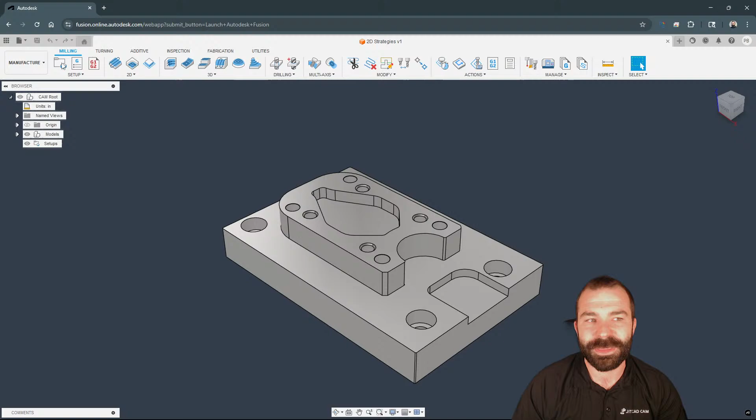But as you guys will see me do here is I can still navigate the same, again, creating my setups, doing my different things inside of Fusion. I just thought you guys would like to see something like this. That's all. So again, my XYZ coordinate system going in, maybe we're going to do some adaptive clearing, who knows? And again, as I've always told people, you don't know your car is slow until you get into a car that's faster, of course.

So again, we can turn on all of our cloud libraries, go grab our tooling. I want to get a flat end mill, as you guys see. Pretty typical stuff. Let me know in chat if you guys knew about this or if this is something that might be able to help you out if you're on a little bit of an older machine. Again, as you're going to see, probably going to take a little longer than you would like, but it is something that actually runs CAD and CAM quite well.

So again, I did test it a little bit earlier. It was 10 times slower from a time standpoint when I started throwing more complex stuff at it. But again, it's something nice to have if you don't have a high-end computer as yours truly does. So let's go ahead and go back to my Fusion. Now, if you guys wanted to see that a little bit better on my version of Fusion, again, I pull open that 2D strategies part right here. As you're seeing, my navigation is almost instantaneous.

Now, keep in mind, I am on a 14700F processor. It is a later generation. So as you're seeing me move, it's of course acting much better and much quicker than most people would anticipate, depending on your price tag, right? So again, as you guys are seeing me go through my library, same thing. We're just going to grab a 1/2-inch flat end mill. And just like that, we're programming our part, right?

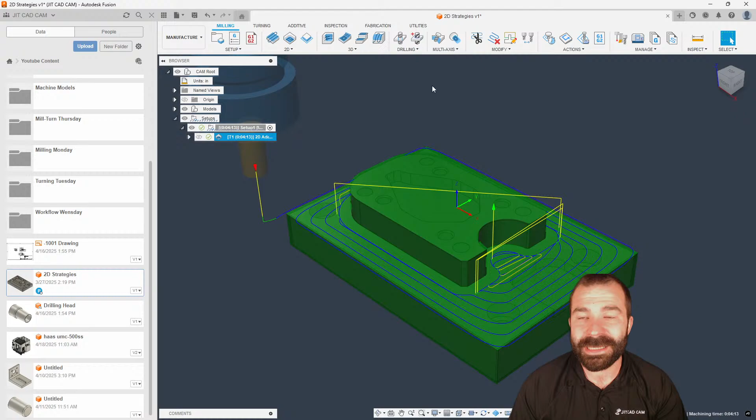So as you saw, again, in a pinch, works quite well. Maybe you don't have the best of machines, or if I had my tablet near me, I could actually pull this up on my tablet. So getting back into the other thing that Travis was already asking about is the permissions so that you don't have to deal with the email verification code.

Now, a lot of you are going to question what that is, but what I'm going to do is I'm going to go to my profile. I'm going to verify my profile real quick so that you guys don't steal any of my information that's not already on my website, right? So give me a second here. I'm on my other screen. And where is it here? They must have moved it, because I do remember there was a time where you can't necessarily turn it off, but you can actually go in and, oh, so you can't even turn it off anymore, it looks like.

I'm going to pull this over in a second so you guys can see this. I just need to get logged into my account. Yep, and now it's doing the password verification. So let's do this here real quick. So this is what I actually wanted to show you as a whole. So for any of you out there wondering what is happening, this is the new verification process.

It's a 2-step verification. What it's doing is emailing me the code. Now, one thing you can do is you could say, don't ask this on this browser for the next 30 days. So again, what I'm going to do is I got to get back up on my other monitor, grab my passcode.

You guys can write that all down real quick. We're going to get into my actual Fusion account. Now, again, you could set up 2-step verification, and you can actually use something like Google Authenticator by utilizing the QR code. Now, this would work better for a lot of you out there so that you could just get the code directly from your phone.

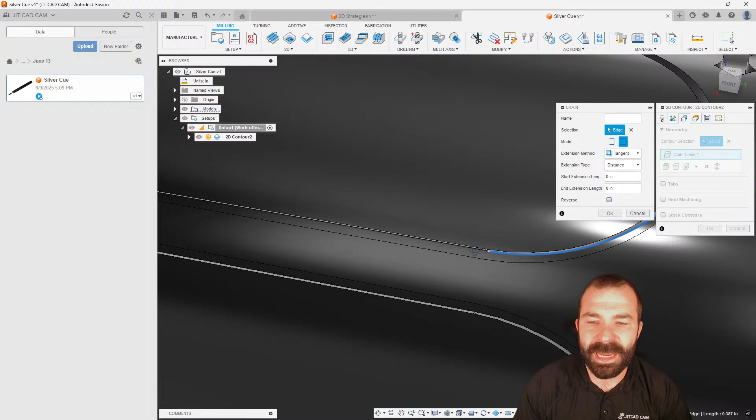open chain. And again, what I did there is I held the Alt key on my keyboard, which allowed me to pick one segment. And then I picked that segment a second time to define how I want to extend it and how I want to wrap it around, right? So again, as you guys can see, I've now defined that very first chain. I always like to start with one and work my way further through.

Again, in this case, we're using a tiny little end mill for this purpose. And just like that, we have now defined a single path around our part that allows us to cut a nice area for us to create that inlay. Now, for a lot of you out there, you're probably going to question, hey, how do I shorten this up so that we're not overlapping or we're running into the part? And while that's pretty easy to do, we're going to have to do a couple of things.

First and foremost, the diameter of my tool, as you can see, is a 10 thou tool. So I'm going to need to reduce my chains by at least half of that, right? So in this case, I'm going to say -5 thou. And as you're going to see, it's going to shorten that little blue segment up a little bit here. And now from that, I'm also going to turn off lead in and lead out.

Again, the goal here is to cut nothing more than a nice clean inlay that we're going to come back and basically press a piece of metal in or use some type of epoxy to make this pretty.

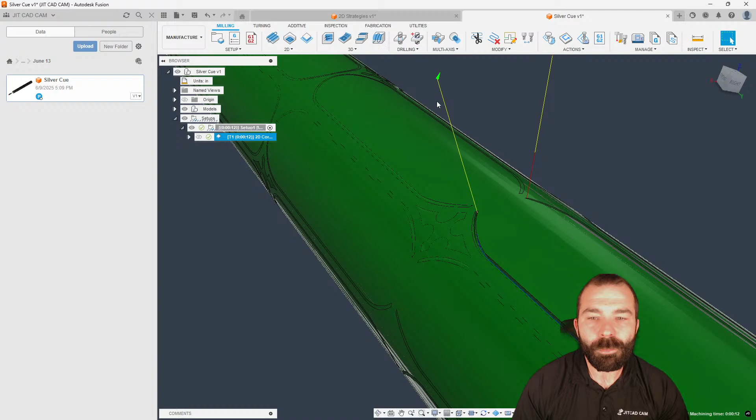So now that I've done that first one, this is where I can go through and I can add additional ones, right? So again, we have our first geometry. Now, something I would pay attention to is if this is something that is identical all the way around, and in this case, that one chain is identical. So I'm going to go ahead and move down the actual axis here, and we're going to define the next segment.

Now, the reason why I'm going to do this is because I have things like the ability to pattern, so that we can actually get everything set up on one clocked position and rotate it around manually. So again, we're going to go ahead and say -5/10. Not 5/10, 5 thou.

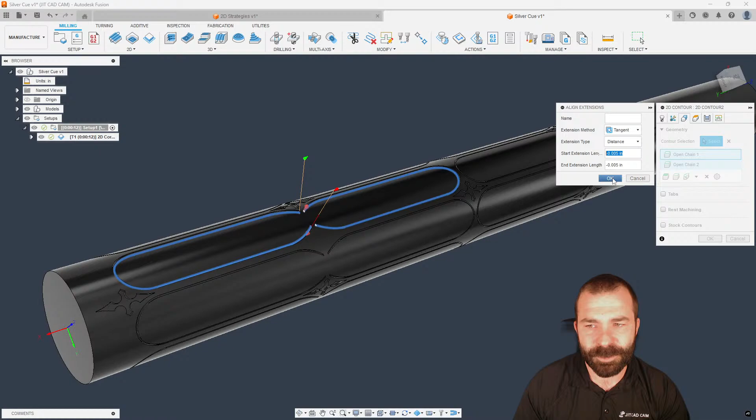Now, here's another pro tip for a lot of you guys out there: in the event that I'm utilizing multiple chains on a part, I can actually highlight those chains using Control to pick each one, or Shift for first and last, and I can align extensions and bulk update these as well. So just keep that in mind. It makes your workflow much easier at the end of the day. We're now doing 2 of them.

And this is where I would turn around and do something like a new pattern. So we're going to say circular pattern around the center of our part. Now it looks to be, what is that, 6 or 7? That's 6. So we're going to do 6 instances. And just like that, we're now cutting that profile all the way around the outside, and we're creating that stock model to show us where our inlays are, right?

The start minus the start extension. Run that by me one more time, Travis. Granted, Travis, you have my cell phone. You could always just call me and we could put you on the phone live.

So again, as you guys can see, we do one, and we patterned around to do the others. We could incorporate the same thing here for any other decorative pieces. The luxury of the 2D is you are getting what's called the wrapped toolpaths. So we could say a wrapped 2D adaptive clearing. I need to pick my geometry, or actually my cylinder wrap around, the pocket which I want to machine out.

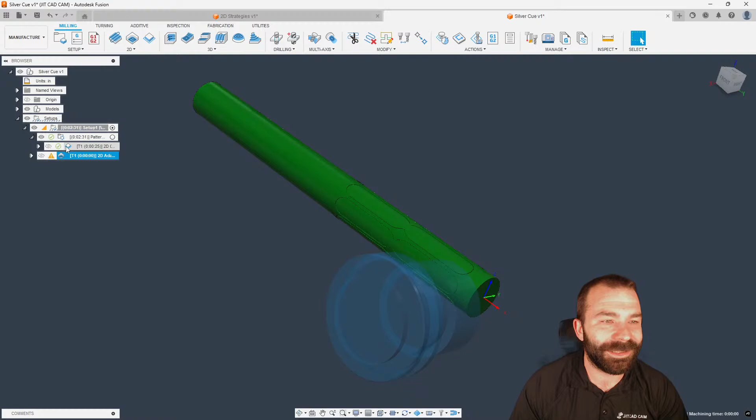Yeah. So I misread Travis's message. He's saying a negative on the start, which is exactly what I ended up doing, and I'll show that to you guys here. Let's jump back. When I was setting up my extensions, his comment was about a negative on the start, meaning add a negative versus a positive if you wanted to create an extension that starts further out. I've shortened mine up by just typing in a negative, and that shortened up my chain. So awesome, Travis. Thanks for pointing that out. I appreciate it.

So let's go back and see what we have going on here. We do have an issue with our toolpath. Is that, oh, nope, that is an email. So we're going to skip that one. What we're trying to figure out is why we can't do an adaptive clearing in this pocket. The problem is Fusion is not doing the best job of telling us why it can't do it, so we need to be more investigative. It is saying invalid tool. So let's go in and swap out our tool.

Now, keep in mind, right now we have a ball end mill on here. In this case, it's actually not a ball. It is a ball, but it isn't a ball. So let's fix our tool. First and foremost, let's double check our cutter and get this swapped back out to a flat end mill, not a ball end mill.

As you guys can imagine, yours truly has completely wrecked some of the tooling in the tooling catalogs, because I get to play this game all the time of how do I troubleshoot? How do I get something to work right? What does it need? What doesn't it need, right?

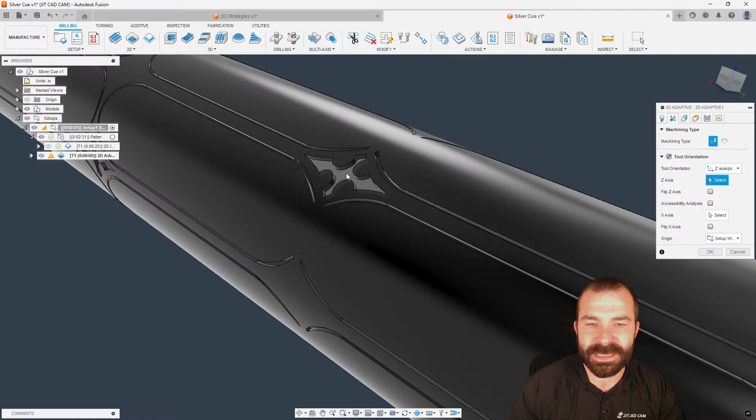Now, as you're going to see, it's going to be a little tricky because there is no vertical line in this pocket. So I would need some way to create a flat. Now, I am actually going to steal possibly one of those vertical lines on the end of my part. And even that is not allowing me to set my Z axis. So this is, again, where I might need to do something which involves jumping back to the design.

Now, if I create something like a plane, and again, that can be a plane through two edges, plane through 3 points. There's a ton of things that work really, really good to set a clock position. So what I'm going to do is I'm going to do a 3-point plane. So let's go ahead and grab 3 separate points here. So as you're seeing me do is I'm actually using those couple of corners down there at the bottom.

And again, I'm getting an issue. And that issue is because we do not have construction planes turned on. So again, as you guys are seeing in real time, I've now created a plane that should be flat across all 3 of those points. So again, we go back to manufacture. Let's go back into our toolpath, utilizing our tool orientation. I'm going to go ahead and pick that plane.

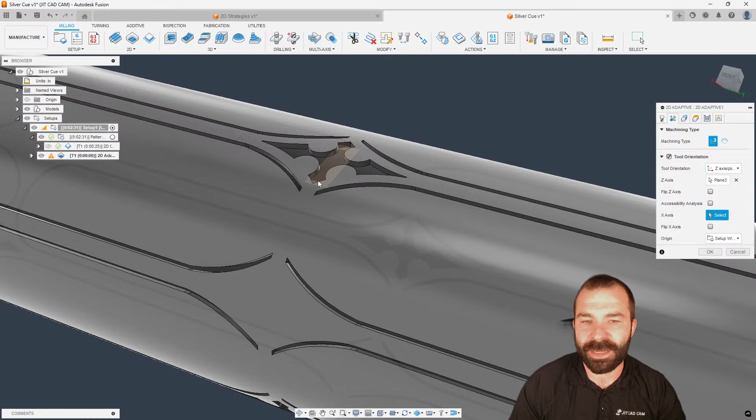Now, if you're having troubles picking this plane, something neat you could do is you can click and hold. Again, that's a left click and hold. And as you're seeing, it's giving me all of the faces within the view of where my mouse was. So I know that is a plane. It's not the bottom of the pocket. It's not the outside cylinder. It's just that plane face. And now you can see my Z axis is orientated up. Again, let's go ahead and hit OK and see what we get.

So as you're seeing, some of my problems in this case, now taking you guys on a wild goose chase here, just because I like to show you guys what we go through, how to troubleshoot stuff. It seems to work much better for you. And as I always tell people, my end goal is for you to not ask me questions, right?

So a couple of things are probably throwing off this wrap toolpath. Number one, the size of this tool can't really get in here the best because of what we have called stock to leave. Now, the stock to leave is massive when you consider this is a 10 thou tool and we're leaving 20 everywhere. Again, adaptive clearing is a roughing strategy. So let's go ahead and change our stock to leave and let's go down to about 5 thou.

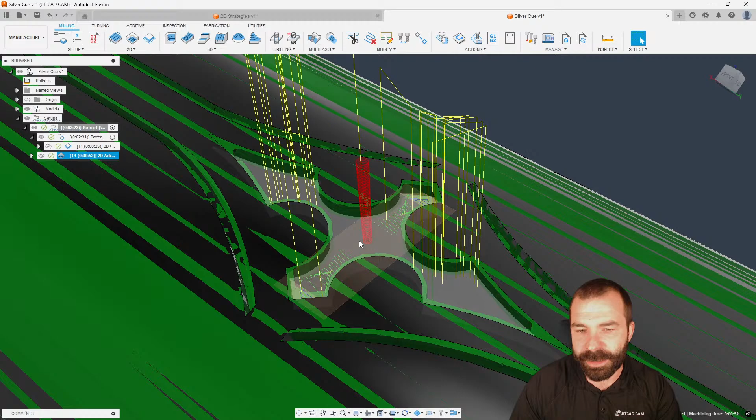Now, keep in mind, a 10 thou tool, I'm going to have to make a couple of finish passes at some point, but this should, in theory, give us a lot more room to work with. And again, why we can't see that toolpath is because it is a concave or convex shape at the bottom here, but our plane actually sits below that. But I can see we are now working in the entire area.

So again, let's go back to 2D adaptive clearing. Let's get rid of that tool orientation, turn back on our wrapped, round the outside cylinder, and see what we get. So as you guys are going to see now, wrapped toolpath did work. It did work with that tool. The problem is we didn't have enough area for that tool to work within, right? So I would have had to go to a smaller tool, or, in this case, I changed my stock to leave.

And again, pro tip for a lot of you guys out there, we can go ahead and just jump straight into our 2D contour for finishing. And another trick I like to show people is, in the event that you wanted to, we could actually use 2D pocket clearing to go ahead and clean up those floors as well. So again, we're using a roughing strategy that uses flutes, right? The side of the tool to open everything up.

Then we come back with our pocket clearing. Again, this is going to give us a nice floor kind of pattern, clean everything up on that floor. Lastly, cleaning everything up on the walls, as you can see. So one thing I am seeing here is, one, my graphics card is starting to hit the end and the limits of what this wants to calculate. This is where I love this new ability to go in and say, you know what, I need more quality.

I need to change out to maybe custom presets. But I can see here that we are finishing deeper on the contour than we are on the pocket.

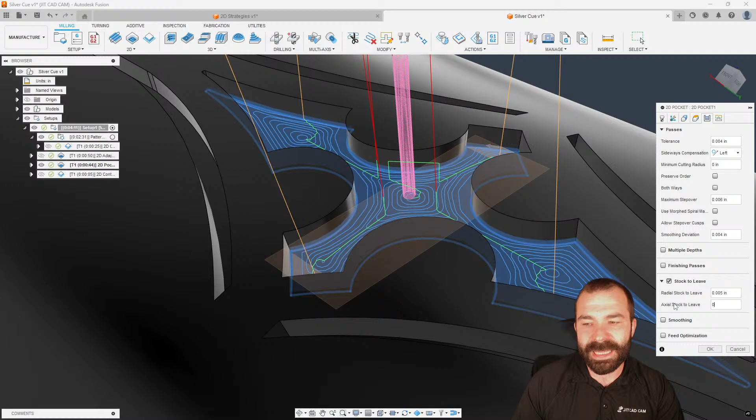I'm going to get to your part here in a minute, but let's wrap this up the rest of the way, right? So again, we jump in. In this case, our stock to leave on the axial is going to be 0. Again, we want to go deeper. We want to go to the true depth of that pocket. And just like that, you're now working all the way down to the floor. And then we're cleaning up our walls.

And if we were to turn our model off, you can see this is a little better representation. But because this is so small, the mesh in the background is what we're starting to see fall apart more than it is actually my graphics card.

So Ash, let's go ahead and get your part opened up. I'm going to go ahead and swap screens here real quick. Give me a sec. Ash, where did you send that to? Did you put that in as a support ticket? You did. Awesome. A chatter-free toolpath on a copper bushing. Oh, man. You guys making fun of me, don't you? Go ahead and get you all opened up here. I'm going to go ahead and minimize my other screen so I can keep an eye on you guys.

How's everybody's Friday going? I hope your guys' Friday is doing way better than the start of this stream did.

Stuart, I'm running a 4060 graphics card. It's nothing special at the end of the day. Again, I just did a pre-build system. I bought an Alienware computer. I put more RAM in it personally, but there were 2 things that I knew going into it that I recommend to everybody. Go for a high-end processor. You don't need a high-end graphics card, right? Perfect example, 14700F is what I have for a CPU. And then my graphics card is just a 4060. Now, given the generational stuff, that whole total bill, I think, came out to like $1,300, and it runs like a champ.

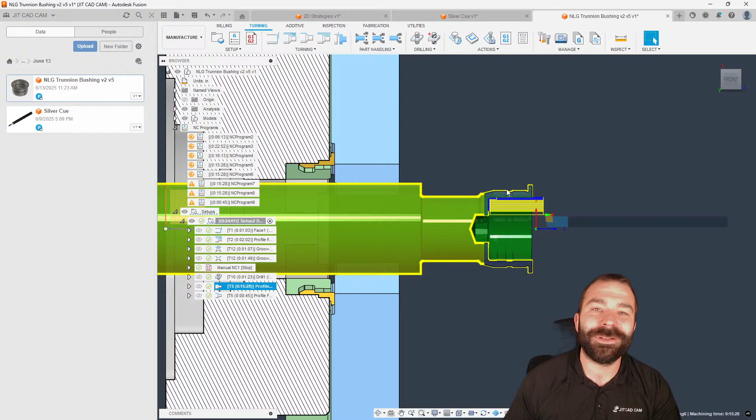Some chatter be gone spray. I like it. I've seen every trick in the book at this point. I think I've seen people tape, you know, quarters onto stuff, rubber bands. Travis, we could always take a look at the specs of your laptop. No offense to Travis. I'm not calling anybody out here. I see it all the time on the Facebook groups where people are like, man, I have a $3,000 computer. Why doesn't Fusion run right? Well, first and foremost, it was $3,000 3 years ago, which means it's like a $600 computer. But as you can see, we can also evaluate that. I do have some good videos on performance settings to help you guys out as well.

So anytime you are doing the bore on the ID, you're getting chatter. So let's look at a couple of things. First and foremost, toolpath looks pretty good overall. I don't see anything too crazy here. So what I'm going to do is I'm going to go ahead and edit the toolpath. Now, very first thing I always like to look at is what your speeds and feeds are kind of at, and what they should be at based on your tooling.

Now, if you can, in this case, Ash, can you throw into the chat if you have the actual specs on your tooling, like insert ID or an EDP number? We can look it up and take a look. I would assume, and this is just a quick assumption, if you're running at 2,500 RPMs and a feed rate of 2,000, you may be too aggressive on this cut altogether. Now, don't quote me on that. That's why I want to see the speeds and feeds based on the material, right?

So let's move a little bit further over. Now, another thing that I have seen in the past cause problems from chattering is that you're taking too small of a depth of cut, right? So again, it's depending on, and I learned this lesson very hard on milling.

So if I go back here to this 2D strategy, I used to get these tools. Now, this is not me promoting a special company, but Destiny Tools makes some killer tools for running in aluminum, but you have to be able to push them as hard as the tool requires, or else they sound absolutely terrible. It was one of the first times in my career where I was taking a 40% step over and a 2 to 3 times depth of cut and running just crazy, crazy hard, right?

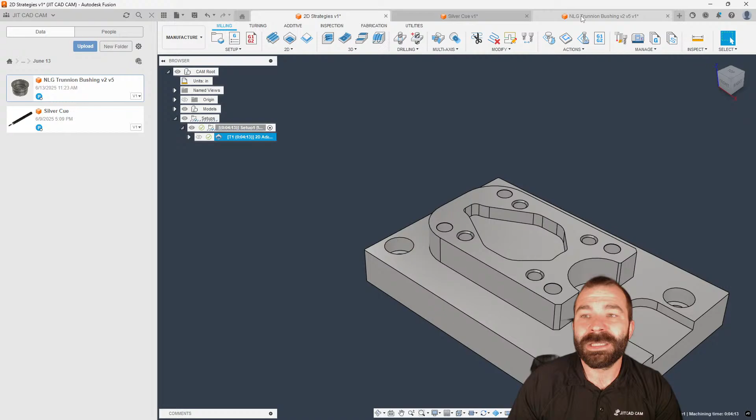So again, it looks like we have a KC 730 insert. Who makes that insert exactly? We'll give you a few minutes. Is that from Haas? Kennametal. All right.

Stuart says just tell ChatGPT what you want. Osman's got an entire inner tube from a bicycle wrapped around his machine to help with dampening chatter.

A few other questions I would have for you, Ash, as we kind of walk through this: one, this boring bar is massive. How far is that boring bar sticking out will always be a good question as well.

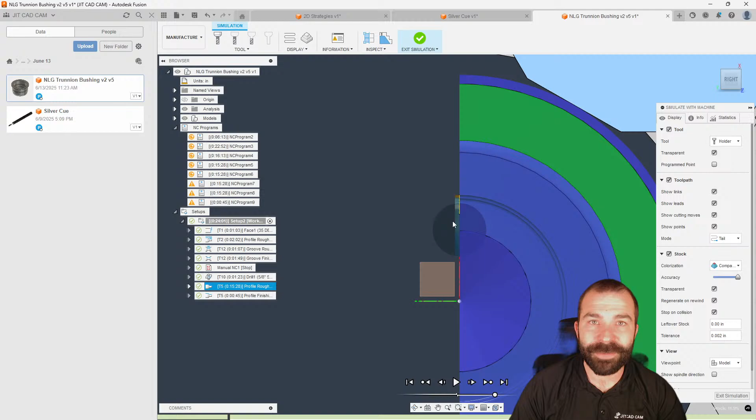Sorry, guys. I got a couple of emails and texts. Let me just double verify everything real quick.

But again, for non-ferrous, I always lean towards H1 shiny inserts from China. Designed for aluminum. The sharp edge does the trick. But he turns manual. Cosmin, that's a great point for sure.

The first part of the chat says it doesn't chatter that much. So all your OD stuff isn't chattering? Is that the same inserts on the OD? So that would be my narrowing down so far. First and foremost, if your OD work is going very, very well and you're not getting chatter by any means, that would tell me: one, is it the insert? Is it the insert material? Is the alignment of the insert actually proper, right?

So I do see this a lot on boring bars: you start chasing your tail and wondering why something's not working right. But when you look at the orientation of the boring bar, now I'm looking at this straight down the end. Let's get flipped here and let's get material out of the way. As you guys can see, my boring bar might be angular, off a few degrees, either up or down, right?

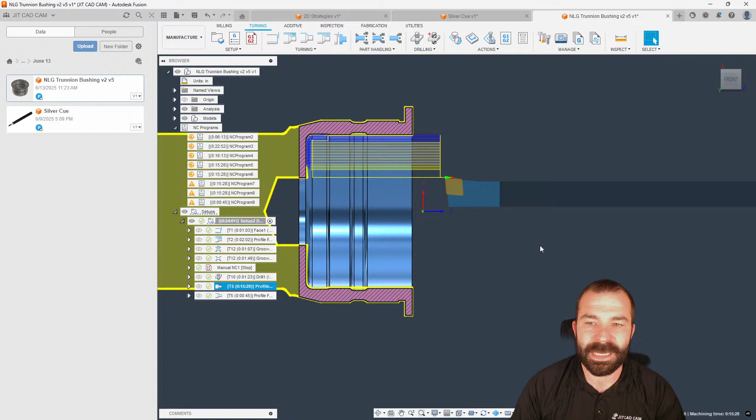I would tell you, because you're dealing with an X-axis kind of machine, an easy way is to put a parallel on top of it and then an indicator over here on your spindle and then just run it in and run it on your X, because you should have flats on there, right? And again, this could just be, is it in an actual sleeve or is it flat mounted on a tool post?

Hold on one, guys. I got a phone call that keeps coming in. Give me 1 second here. All right. Oh, wrong screen.

We're back. Okay. So it's in a sleeve. Yeah. So when you put a lot of these in a sleeve and it's got a couple of set screws that go down on top of it, when you tighten those set screws, sometimes it rotates itself or it doesn't actually sit flat. So again, this would just be my take. Key element number one: let's make sure you have the right speeds and feeds. I see a lot of bad come from the wrong speeds and feeds or the wrong depth of cuts.

Given these are Kennametal inserts, you should be able to email the tooling rep and he should be able to get you with an applications guy. Ash, I don't know where you're located in the US. If you're in Minnesota, reach out to me. I know the apps guy. I will get you in contact. But that would be the one thing that I tend to look at.

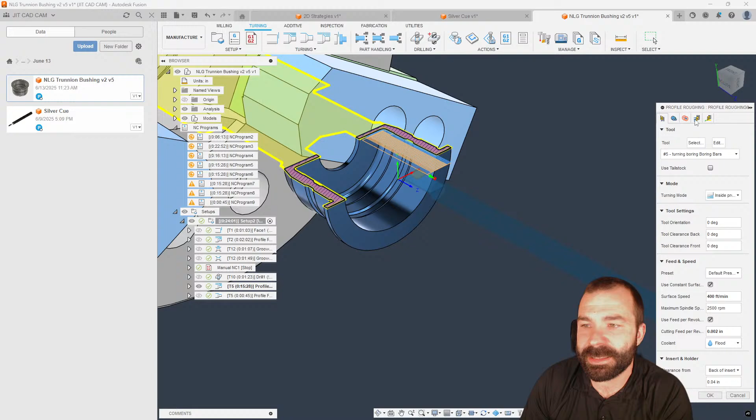I don't think you're wrong. Also, Ash, I think by all means, you could have easily also done something on the inside. Now, I am going to fix what you have going on here because it looks like you actually plugged in things in the wrong order. Because it looks like you're trying to drill at one point. Let's get this window moved over. You're drilling with a 5/8 solid carbide drill. And I see this mistake. Again, Ash, nothing bad on your part.

Inner radius, that should actually be where we plug in our 5/8. And then what I like to do is point my clearance at my inner, right? So we're going to say inner, and then I would like to back off by about 40. Now, what you're going to see here on my Fusion is, one, this tool path is now going to start all the way back out here where this blue line is. And then we're only going to wrap it off back to that orange line. So as you guys will see, now we're getting that full tool path that we were having some problems with.

Oh, crap. Travis has got a TM1P. That's the machine I learned on back in the Marine Corps. That's a great machine. I think a lot of people give that machine a hard time, but man, that machine can do so much.

So as you guys saw, I went ahead and adjusted that inside bore tool path. When we simulated this originally, you guys noticed that we were hitting with a really big cut the first time through. This time we're making that nice clean first cut, second cut, third cut, right? So again, based on the information that we're given, it sounds like he's only getting trouble with this tool on the inside of the part, which would lead me to believe it's something with the tool, whether it be speeds and feeds or the way the tool is in the machine.

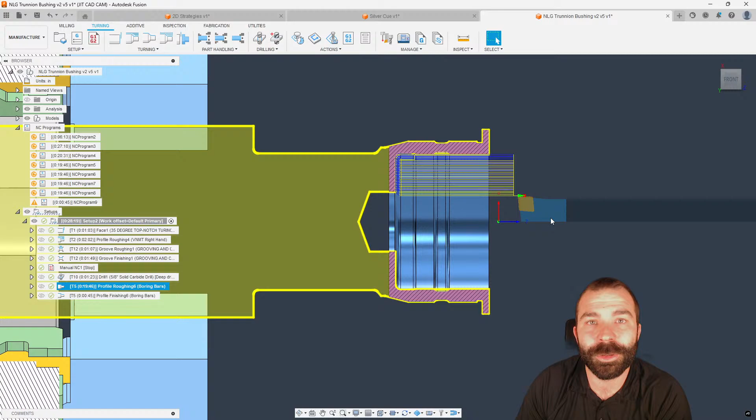So you just had to pick up from a different location. Okay. Adaptive turning in this case isn't going to do anything of value. Now, if we were talking about something like the outside of this part, the reason why I say it's not going to do anything of value is because it's all based on the geometry, right?

So if we did turning adaptive roughing here, let's go ahead and pick our tool. Now, what it's going to want is a grooving tool or like a lollipop or a dog bone. I stand corrected. Give me a sec here. It did not like that tool. So let's go back to the default library. And we are going to grab the OD grooving tool. Now this one here, if I can get it moved, you're going to see it's a circle profile.

And as you're going to notice, what it's going to do is kind of like adaptive clearing on the mill. The idea is that it's going to slowly load up that tool using arcs and radiuses. And with that, it's going to try to maximize tool engagement before it actually comes out of the cut, right?

So again, because we're kind of working in a valley here, it works really well to come in, or if you work on like a hub or something like that, where you have space in between, this is where that arcing in, arcing out to help pull that chip and constantly engage that cutter is going to work quite well. Stuart, I hope that helps you out a little bit.

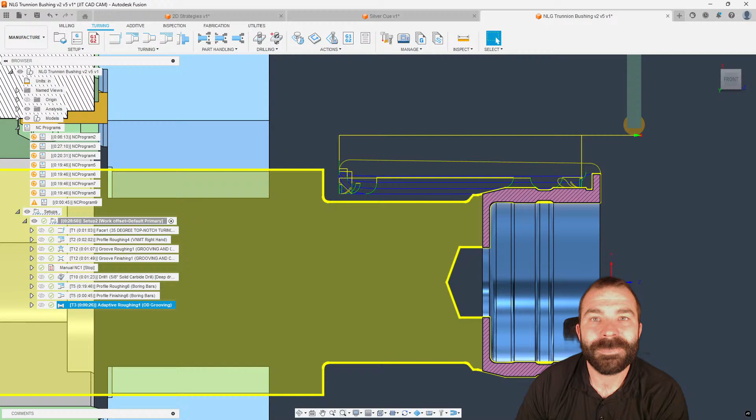So I think if you would switch this part, and hear me out, this is just my thought on it, you have a lot of meat here on this particular part. Now, this would be something that might work. So Ash, did you end up making one out of, say, a piece of aluminum just to test run it? Because your vibration on the mill could be from the flute hitting as you go around it.

So Ash, that would be where I would start, because if you put a piece of aluminum in there and you reran this part and you still get chatter from this tool, that would lead me to believe that it's 100% on the tool and the way the tool is in the machine, right? Now you would have to adjust your speeds and feeds, of course, but if you adjust your speeds and feeds for aluminum, you run it, it runs perfect, no chatter, no vibrations, you know that it's speeds and feeds on the insert. It's not the holder or the holder being clocked a little bit in the machine.

Facing from the inside out. Good question. So I'm going to take this facing cycle right here. Go over to our passes tab. Now you're going to notice we can actually change from outside to inside to inside to outside. So again, very easily by swapping that one particular thing. Go ahead and simulate now.

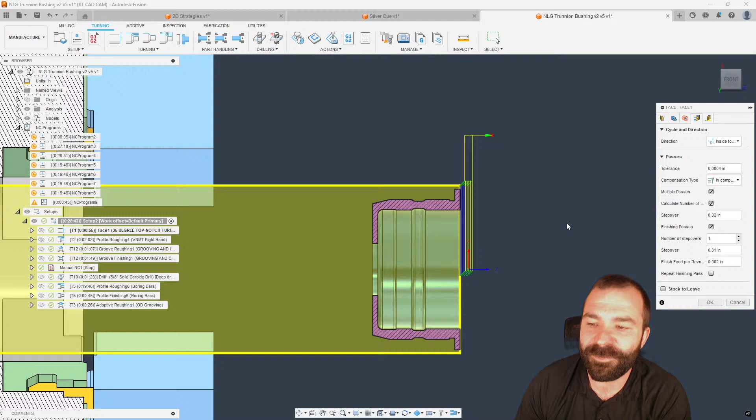You're going to notice we come all the way to the inside of our part, and then we are back dragging outwards. Now we are getting collisions here because Fusion is thinking we're hitting and we're starting to load that tool up too much. Now that is adjustable in your settings. So if you were to try to get rid of those errors, just remember when you're doing your actual tool setup, we don't see it here. So we are back dragging on that tool, and that is what Fusion thinks is causing an actual collision.

Now, something I prefer to do, and this is just me, is if I wanted to back drag up and around, I'm going to create a new setup here just so we don't have any contamination from tool paths. So let's get our Z-axis flipped around. Beautiful. Stock, we're just going to do a fixed size cylinder. So let's say we were going to do the part the other way, right?

And so we can all see the inside of this part. Let's get our X-axis flipped. So the idea is that you would want to face up and around the outside profile, right? So again, we go in, we create our tool paths as always. Let's go ahead and do an adaptive clearing. Let's go ahead and grab a lovely 35-degree tool.

Beautiful. And now something to keep in mind, this is where we play the game. And this is why I love using the OK method, for you guys out there that are new, or somebody that struggles with getting good tool paths: I just pick the tool path and hit OK. But if I evaluate the blue line scenario, for example, the blue lines don't start far enough in front of my part, and then I go to my tabs, I can see the very first tab is geometry.

This is in my Z axis, right? So this is where I don't want to start the front of my toolpath from model front. I want to start from stock front. And just like that, you're going to notice we can now rough that all out in one shot.

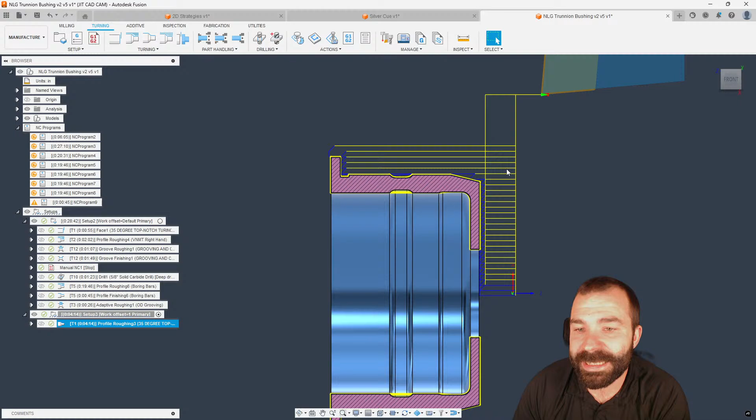Now, if we wanted to get technical with this, this is where we could go in, turning profile finish. The reason why I did that for all of you out there is because it's bringing through that stock front. Again, we use that OK method. And as you can see, we're going in, we're starting all the way down at the bottom, dragging up, out, and around our profile to finish that part.

Bogdan, I hope this helps you a little bit. I'm going to go ahead and simulate this just to show you guys. Again, we're starting down at the front of our part. We're dragging up, around, and all the way out and finish cycle.

Now, there's a couple of cool things you could do with this even further, right? So based on this tool profile, I may not want to back drag. And by back drag, I mean drag it up this surface, right? So I can do things like turn on no drag. And what no dragging is going to do now is force the tool to always feed in on X or in on Z. It's never going to try to pull back in a cut.

So as you guys will see here now, we'll go ahead and simulate this one more time. In this case, we are facing traditionally down the front of my part. And then we are coming back in and turning the OD and making our way down. Again, you've noticed we jumped out there because we didn't want to hit this back wall and drag up. We want to come out, around, and back down. And then again, we come back up to that top segment and we went ahead and cut that little area there. So again, no dragging, great asset.

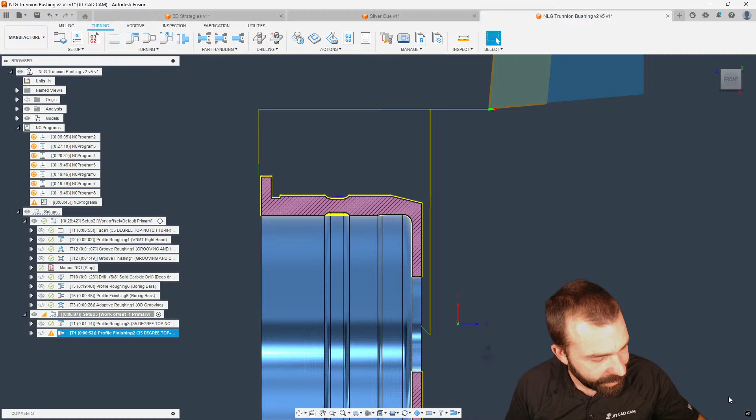Cool. Any other questions outside of that? I see my phone keeps going on. Are we getting any? Looks like that is just a reminder. Awesome. I'm going to go ahead and check my emails now.

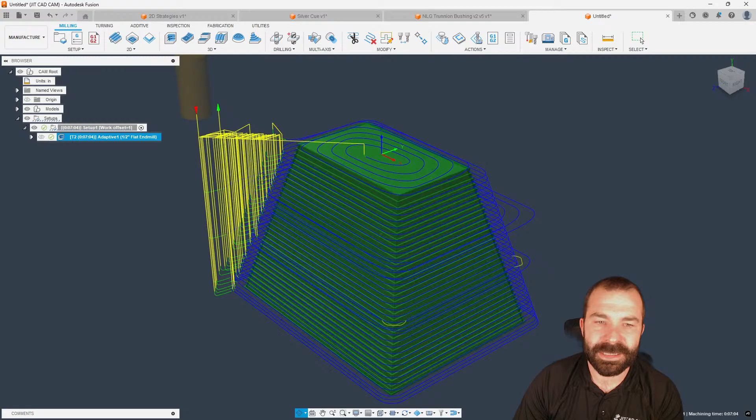So the curiosity is, and I understand this completely, when we run this particular toolpath, we work at a maximum depth and then we work upwards. Because we've achieved maximum depth, we may need so much horsepower, so much torque, but as we move upwards, we are taking a smaller and smaller cut against that material. So the question is, can we speed up the process working upwards? Well, there's no real easy way to do this.

As you can see, there's what's called optimal load. There's no other settings outside of maximum roughing step down. You have fine step downs. You can do what's called machine shallow areas, but this isn't going to adjust your speeds and feeds. So what I tell most people is if you're really trying to get a lot out of your cycle time, a really neat trick is, one, take your maximum roughing step down and increase your fine step down.

Now, if I was to say 0.9 and then do half of that at 0.45, what you're going to notice is I have a lot less of a staircase effect here. So one, I've reduced cycle time by nothing more than upping what that actual roughing toolpath is doing.

So instead of letting it do what it's doing by default, which I think is a 10% step down or fine step down, AKA step back up, what I could do is one, increase that number and reduce the number of steps. Because to me, I could always come in after the fact, do something like a 3D ramp, right? And with that 3D ramp, this is where the fun and the magic happens, of course.

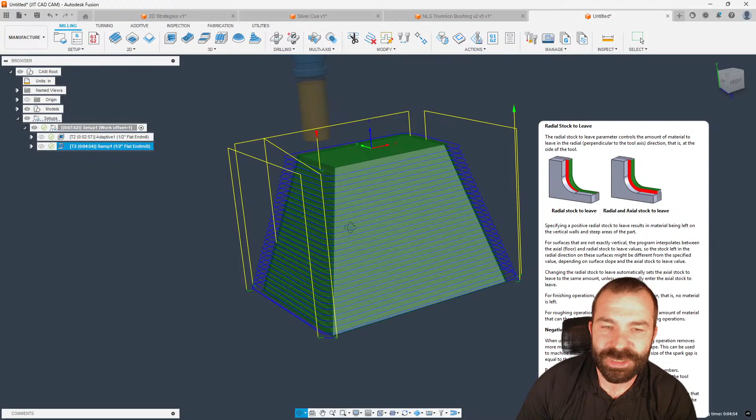You guys like this menu stuck here?

So again, I can now come back with a secondary toolpath, ramp my feed rate up super high. Again, just some examples here. Instead of doing 120, let's go 200. Again, reducing that cycle time as you guys see, but this would be a good way to, again, bust all of those steps off or all those cusps, right?

So again, with that, now if I was to actually approach this part, and this is something that I really needed to machine out in a hurry, I might actually, instead of using adaptive clearing, because again, as I've showed you guys in my videos, adaptive clearing goes max depth and then up. If I was to do something like pocket clearing, now what I'm going to do here is I am going to jump ahead and turn rest machining off so you guys can see this.

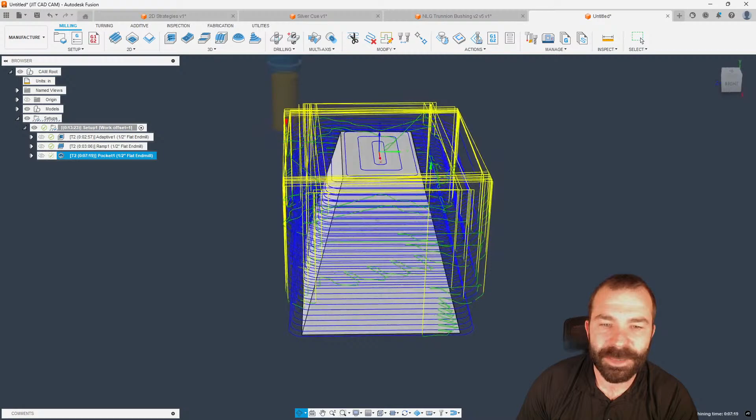Now this is where, again, as I go back in, instead of running at 7,000 RPMs, I can crank my machine out to 12,000. I can get my cutting feed rate up to like 450, not 4,500. And just like that, we've now swapped out our strategy, again, speeding up cycle time, achieving a very small step down that part profile. Again, no right or wrong, but the idea that you're able to set how much that tool can override its feed rate based on the material or the material removal area is not a possibility, Stuart.

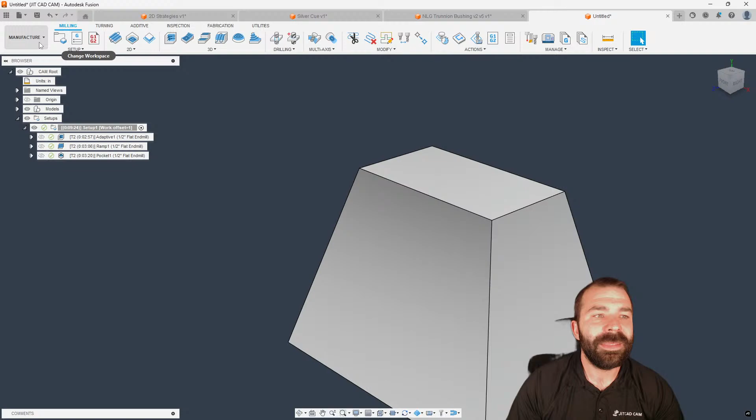Yeah, Stuart, I mean, you're 100% correct. I always, when I'm going to machine a part, although adaptive clearing is nice, it's more about what is the finished profile and what is my goal, right? You guys saw me jump right into this actual part profile, sticking with the same tool. If I was doing a mold or something very important, this is where, let me get back to design and get a couple more features on here.

Let's say these corners are actually radiused, of course, and you never know what you're going to get, right? This is where, again, I could jump into ramp from adaptive clearing. And this might be where I swap my tool out. Again, we could go to something like a ball. Now, I like the idea of a ball in these very high vertical surfaces. So again, we'll just go 1/2 inch ball. We'll hit it with some finishing.

And again, this is where we can use something like a bigger max step down. Let's say 150. We're going to actually take it from 20 down to 10. And just like that, we've now pre-finished that as much as we can. Again, the whole goal is to get rid of as many of those cusps as possible so that our tool isn't deflecting and chattering because of that prerequisite of surface, right? Again, this is just, as I would call it, a pre-finish.

If I could spell finish. So based on the default tooling, again, we just play that game. What is the max that I can push it? Maybe we can get closer to like 250. Again, we're going to come back later. After the fact, we can actually set that up to do something else.

We could hit it with that same tool path again. Maybe we're going to now do contour instead. And as you guys can see, we can swap out back to our original finish. Again, as you guys are seeing, there was also that custom one there. That was a recent product update that I keep forgetting about. But as you see, we just play the game. What's it going to take to get the actual true surface that I really want at the end of the day, right? Again, let's reorder this a little bit.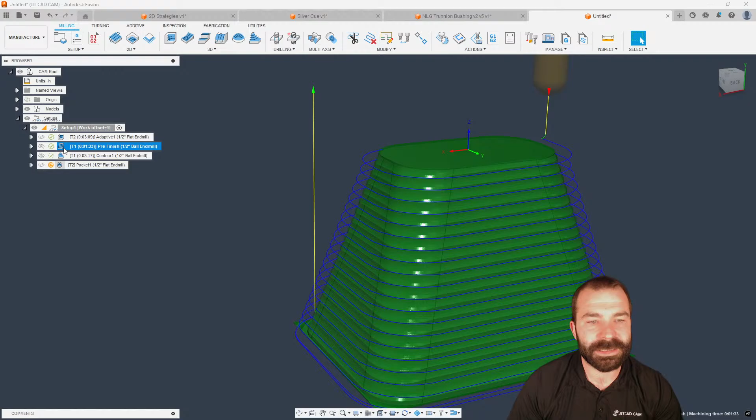Yep, big diameter ball end mill. The bigger, the better. Stuart, when you really start to talk and get into that realm of things, though, this is where I like the fact that when we talk about like geodesic, is the ability to utilize things like those circle segment cutters and better tooling overall. Again, you're going to get a big radius out of a little diameter tool, right? So again, as if this was your game plan, use something like this.

You guys haven't seen me do some of this stuff yet. We have the ability to change, again, blend versus scallop, drive of our surfaces. There we go. Let's go with, actually, we're not going to get blend there. We're going to leave it on scallop. I am going to have to not use that toolpath because the barrel cutters only work in multi-axis contour, isn't it? Multi-axis contour, of course. Circle segment cutter.

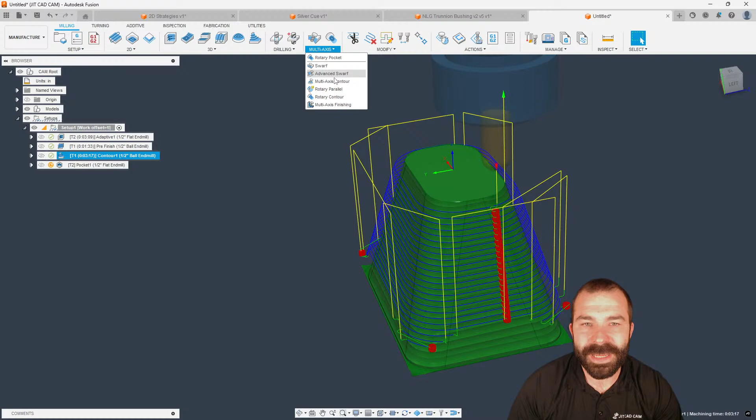I picked the wrong toolpath. Not multi-axis contour. Man, I'm just having one of them days. We want multi-axis finishing. We want our circle segment cutter. Our tool is no longer red, which means this is supposed to work. No floors. Beautiful. All right. So we don't have any floor surfaces. We could give this some wall surfaces.

We're going to go ahead and lie to it, see what we can come up with. Actually, we don't want floors. We only want walls. See if we get a tool path. We do not because it's all backwards. So let's go ahead and do a little bit more of movement here. Any other questions outside that? See, it's not going to be happy until we give it a true floor and wall.

Long day. It's always a long day over here. Cool. Any other questions? I'm opening this up to all of you. I see a ton of you guys out there.

I'm going to go ahead and go back to the good old design side of this part. Let's add another rectangle underneath this. We're going to go ahead and extrude it. We now have our floors and walls. We're going to go ahead and throw some fillets on here all the way around. Oh, that is an ugly fillet. Go ahead and undo that.

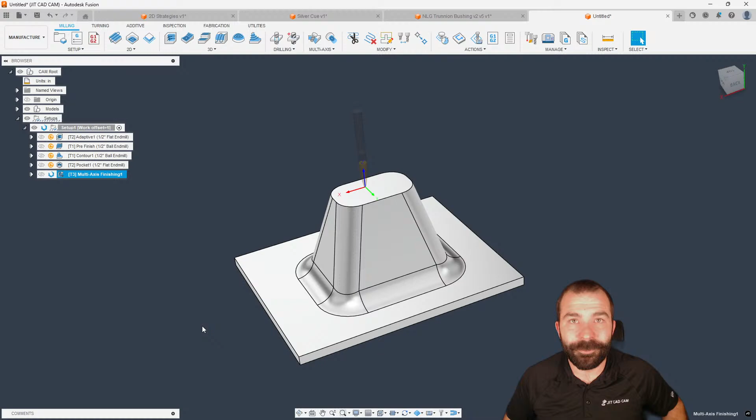Let's move our extrude up in our timeline. That would make sense so that we're now joined as two bodies. And then we can add our fillet around the bottom, right? Hey, look at that. We'll figure it out one way or another, right? Back to manufacture. Edit our tool path. Now give it a real floor somewhere. And just like that, Fusion Phil somehow got himself out of another stuck situation. 30 degrees in the U.

30 degrees Celsius? What is that in Fahrenheit?

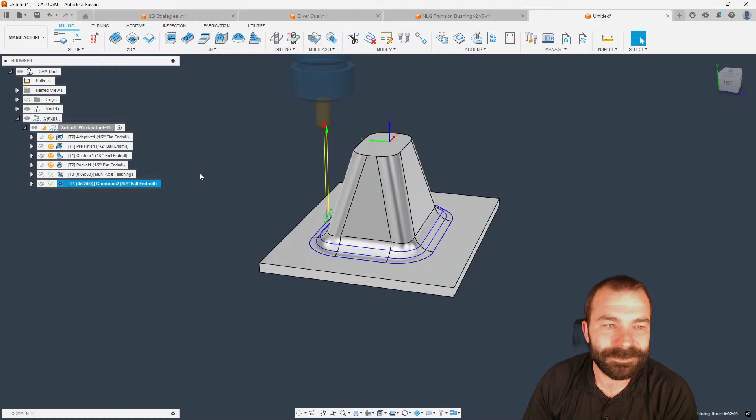So again, we're going to now swap this out because we need some 5-axis action. We're going to leave it set to the bare minimums and see what it gives us. Again, we'll give that a few seconds to calculate. Why not get everything? Let's just go ahead and shoot off everything in here just so we can get toolpaths all the way down and around.

Get our stock model updated. Maybe we throw a little bit more at this. Let's do some advanced swarf maybe. Get back to our flat end mill. I'm gonna need a way better tool to be able to do this, but here's our surfaces.

Any advice on creating a better workflow when it comes to embossing on a sphere? Always run into trouble there. Zach, I would be curious, what is the issue you're having? Is it the clocked position? I need a little bit more info from you on that one.

There we go. We got a nice 5-axis tool path going there. Hey, Lun's in here. So if you guys didn't know, Lun's the one that actually, as he's saying, did provide that pool cue for us to go through and demonstrate.

Now, as you guys are also seeing here, info-wise on this part, we're getting absolutely no A, B, and C motion. And we're also not seeing that because we don't have a machine selected. So let's go back and fix that as well. Here we go. We're going back to multi-axis. We, of course, want collision avoidance. So let's get collision avoidance turned on now.

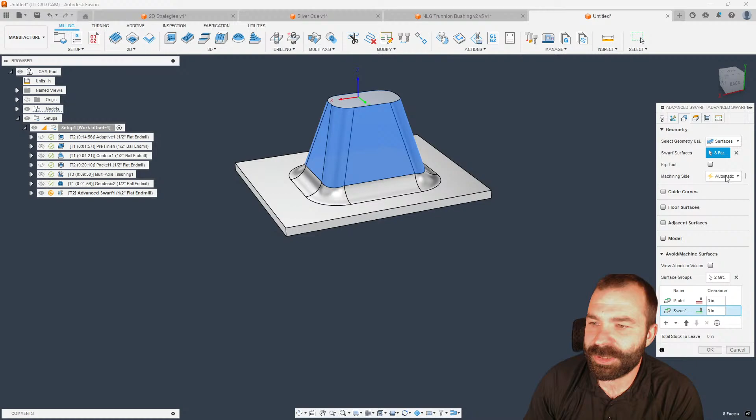And then on our advanced swarf, a lot of our problems are coming from the fact that... let's give this some guide curves. Now, I can think of another reason why this isn't wanting to give us a tool path, which is because that tool isn't going to be able to machine that swarf all the way down in one path. So let's do one more thing here. Let's turn on multiple depths. There we go, multiple depths. And let's just see if we can get anything to start, right?

Let's say we're connecting a sphere to a cylinder and finishing the form. Emboss a sketch feature. Raise surface. Okay, let me run this. Okay, so you're connecting a sphere to a cylinder. So you're making a lollipop, hypothetically. Also run into trouble trying to emboss on a surface that is filleted or chamfered, like a helmet. Ah, okay.

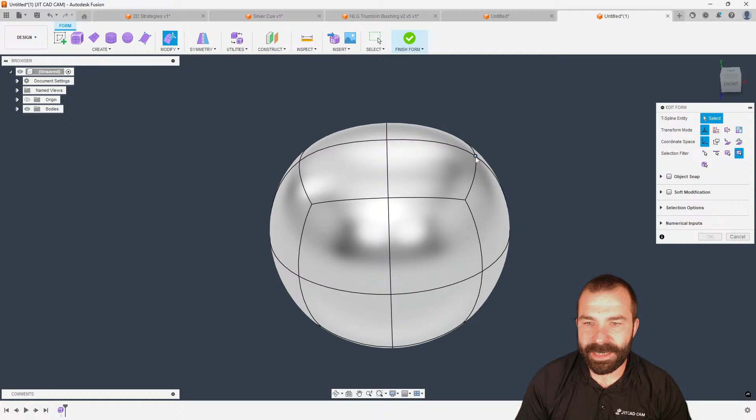So yeah, when you get into embossing on complex curves, it's probably not gonna work the best for you at the end of the day. So what I would say is a couple of things. If we go ahead and shift gears here, let's say I do a form. You guys are gonna see how bad I am at making stuff here real quick in the form tool. Let's just say we flatten out the top a little bit. And we're going to go ahead and just bring in, let's bring this out.

So now we have kind of a weird profile here. And the issue is if you try to create basically an emboss, now if you're doing lettering or anything of that nature, so again, we could say text, throw my text in here wherever I want it. And now I try to emboss this guy onto this surface.

What you're going to notice is one, the placement gets crazy, right? So again, it has a hard time kind of calculating where you want it placed efficiently. So this is kind of one of the things that always is fun: where do I want it? How do I want it? But now where are you getting the error from? Is it once you hit okay, or are you trying to do recessed texture? So again, as that emboss works, now I did just do a form here.

So if we went back, let's say, for example, we go back to this guy, let's go back into design, get some text on here. So again, we're going to do our finished sketch and let's see if we can emboss this.

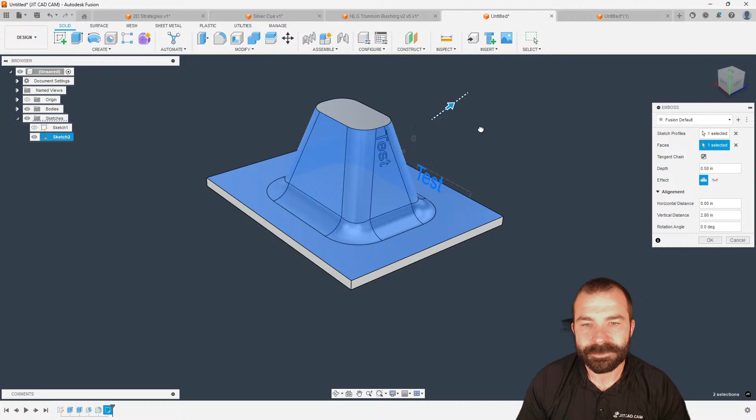This would be something curious I would love to hear from Autodesk on: how does this determine where it goes, right? So again, we are running into an issue in this case where we get too high up, and of course it's not overlapping into the top, but as you can see, when I start to pull it around, it starts flipping all weird, upside down, right side up, things like that.

Zach, feel free to send over something if you have it. Nah, Zach, you're not derailing anything. I bet somebody out there right now is watching this realizing that you could do some pretty crazy emboss stuff.

I know a lot of people always ask me about embossing. Let's say, for example, let's do something like this. Let's do a 3-inch, and there we go. I'm going to put a keyway on here just so you guys can see a reference location, right? My fingers do not seem to want to work. So again, let's say we're going to have a 1/4-inch deep keyway, 1/2 inch wide, and we, of course, are going to go horizontal, vertical, boom.

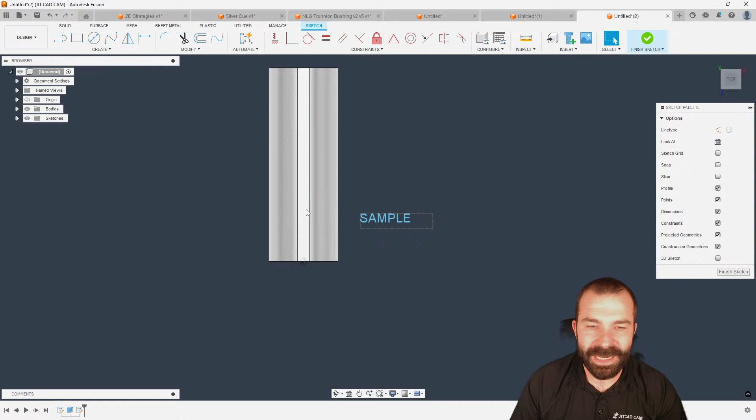And let's make that. Now, let's say, for example, you wanted to put text at a certain position around a cylinder. This is what always becomes kind of wild. Now, again, guys, pre-warning, every once in a while I have to deal with this, and I always forget, so bear with me. But basically, where your text is in reference to center line determines where it's going to wrap around the part, right?

So again, when you emboss something like this based on this cylinder face, what you're going to notice is in this case, it's reflecting straight down onto my part profile, but it's backwards to what I actually need it to be, right? So wherever you end up placing that will make all the difference as to where it is going to be on that part profile.

Now, for this example, if I turn my sketch back on, if you notice, I drag my sketch more to the left, my text now rotates around the cylinder. If I pull it back this way, it goes vice versa. So again, where you're at with your text does make a huge difference on its placement around that cylinder.

Now, again, this could be as simple as me creating this text the wrong direction. Again, we have that ability to flip it. Now that I've flipped my text, you can see my text has now come out normal. Presumably, we should have been sketching from this side, so forth and so on, right? So let's say, for example, I needed that S to start 90 degrees from where that keyway is.

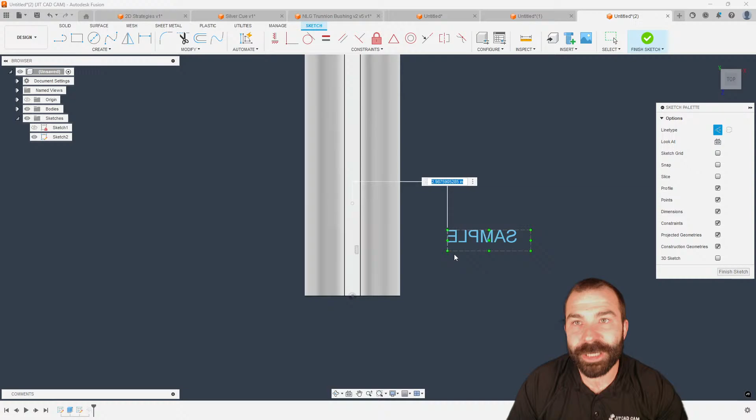So this is where the great world of math is going to be your best friend, because if I have a line, and this is a center line, it's going to be a little tricky to see, but I can add dimensions from here to here. But this is where you're going to have to figure out that good old-fashioned math, good pi, 3.14. We don't need to find radius. We just need to find circumference. Trying to remember: 2 pi r, yada, yada, yada, right? So again, that would be the way you could do the math to get what you needed done.

Zach, did you go ahead and send something in or not? We'll give you a few more minutes here. Let me get back over to my email, make sure nothing came in.

For those of you wondering, yes, I'm typing in how to find the circumference of a circle right now. All right, there we go. We got it. So I was correct. It was 2 pi r, or in this case, 1.5. So again, we could go back. So if we say 2 times, extra credit for anybody out there if they know if there's an expression that you can utilize. And then we're going to go ahead and divide that by 4.

And just like that, we have now started our text at a certain point wrapped around our cylinder. Again, with just a little bit of math. Obviously, my math is off. Can't be perfect all the time. Again, my text is backwards, which is also causing some problems.

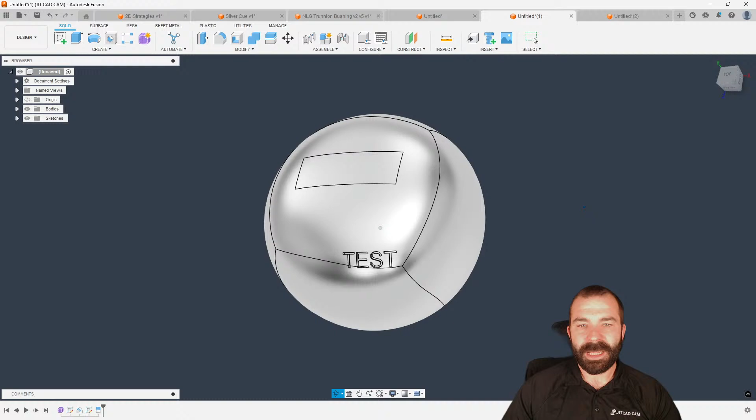And then from there, if I actually go in and I do a split face, so I want to split this face or multiple faces using that actual sketch. As you can see, I can now utilize something like press pull to pull out that mohawk. Now, if I didn't want that to taper, because what's happening is it is tapering all back to center of rotation, I could do a split body this time. I want to split this guy based on that sketch.

So let's go ahead and get that sketch turned back on. And as you can see, it's now going to cut that area. And now I have basically 2 bodies to work with. Now I will have to also split body this guy based on a surface. And in this case, this is where we start to hit those errors and issues, but I have a couple of tricks for that as well. So again, what we're really looking for is to keep this body inside of this area. So what I could do is get that center section turned off.

Sometimes you can get Fusion to self-heal, clicking a couple of surfaces and hitting delete. In this case, it did not. But if I click the top surface, it did. Back again with my mohawk that maintains that same profile around the outside. And now it is square to the world.

So let's go back over, Zach. Let's see here. Let's get your model pulled up. Give me a sec here. I'm refreshing my system. Zach, where did you email in that part or not?

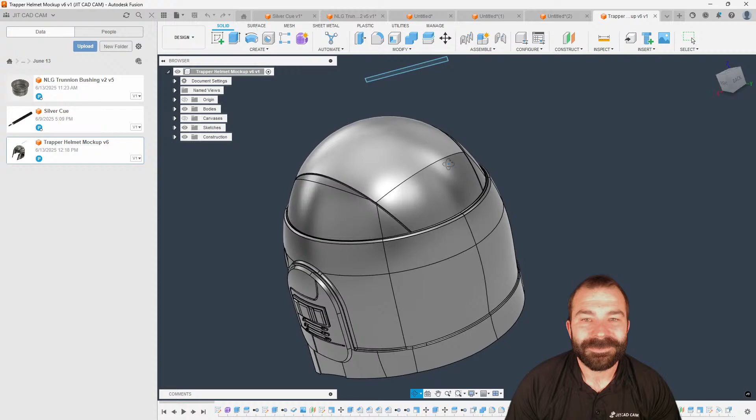All right. Spartan helmet? What is this? Mandalorian Spartan helmet? So if you wanted to put a Mohawk, now I would have to ask, do you want the Mohawk to go all the way down to the back of the helmet? Let's do it all the way down. All right. So I'm going to cheat the system here. Now, given you have this kind of weird profile on the outside, there's a lot of ways you could achieve this. The easiest way, in my opinion, where is your origin? All right. Even better. Your origin's right on center.

Let's just split the helmet in half, right? Oh, we can't split. Hold on here. It's several pieces. Even better. Hey, look at that. You have... what you got going on there? You have a surface and you have more surfaces. Nice. Okay. So what I'm going to do is, one, you have two bodies here. So we're going to have to split this twice, but let's get into it.

So split body. Let's do the top half based on your origin. Again, we're going to go ahead and repeat that split to the bottom half based on that same origin plane. And now presumably what I have is 2 lefts and 2 rights, right? And as you guys can see, that is basically the view at which I would want that mohawk, or how I could go about it.

Is this where, yeah, this is where we roast people, man. Buckle up, it's gonna get good.

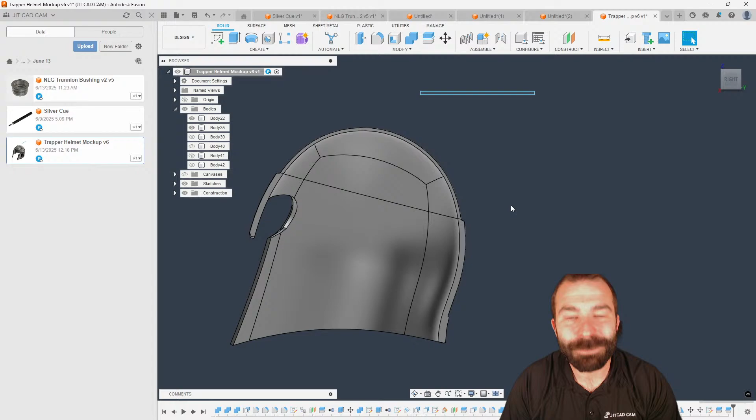No. So again, I am dealing with 2 separate areas when I split this, but the idea would be I just need to create a sketch. Now I could create a sketch on the profile, or I could create a sketch on the plane. Either one that I choose right now is going to require some additional projection. So again, we're going to project everything from this surface as well. And what I'm going to do is get these bodies out of the way so that you guys can see I now have the top of the helmet all the way around to the back covered area, right? So with that, I have the freedom to do quite a bit of stuff.

And what I'm going to do is get some of his other sketches out of my way. But if I wanted a mohawk, presumably, I could go ahead and sketch that first line. Maybe I sketch my second line coming off this projected edge down here. And then if I'm just doing proof of concept, this is why I love the ability just to test run a few things, I might also connect the 2 of these on the inside. You guys will see why here in a minute. Lastly, we're going to hit this with a lovely spline around the outside. It's not pretty. Oh, let's go ahead. I hit escape too quick. Try to cancel the tool versus canceling everything else going on.

We're going to see Elijah next week rocking this on his motorcycle.

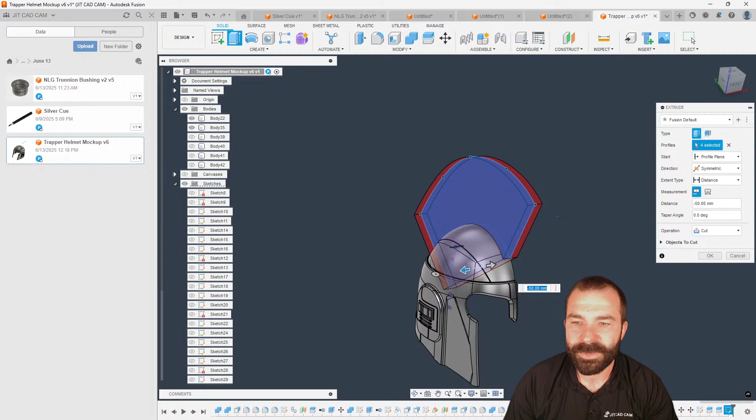So again, this is where I'm going to go ahead and take my areas to be extruded. And in this case, I could actually do one side, or I could do symmetrical. Now I did turn off my bodies, so let's get our bodies turned back on. Again, let's go ahead and say 2 sides or symmetrical. Now that's gonna give it to us right on center. And what I'm gonna do is make this a brand new body.

Again, the whole reason why I'm extruding this lower area, just to be safe, is to make sure that, one, you're gonna notice either we're gonna start to cut into that profile, or if I make this dramatically bigger, at some point we exceed that helmet's profile, right? So again, as you guys can see, we're gonna go ahead and bring that in. That's going to be a brand new body. And as you can see, in short, that's a mohawk, right?

Now, we can go ahead and do a lot more with this. Again, there's the second half of our helmet. If I wanted to, I could now join this stuff back together, do a combine. There's a lot of stuff that you can get away with. Now, again, it's really going to come down to what Zach needs to do, or what Zach is wanting to do with this, more than anything. Zach, you want to give us a little bit more info about what you want or how you want it?

Elijah out there went through a lot to do op 2 of those lures in the other palette I sent. I had to simulate and save the STL file. Awesome. We'll go ahead and take a look at that here in a minute. Yeah, it'll go good with my Leonidas style beard.

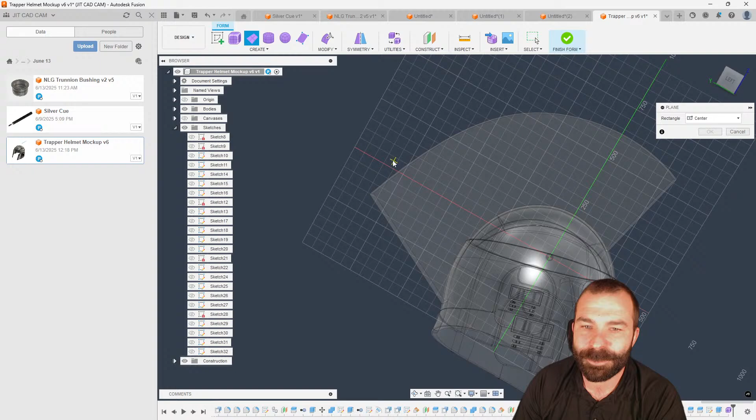So awesome. So, at this point, obviously you've gotten something much better than you expected. We could take this up a few notches. This is kind of the fun thing: if we went over to the form tool, we could actually start using the form tool to make much more organic shapes and profiles. There's no shortage of what you can and cannot do at this point. So if we went ahead and create some surfaces, actually, we're going to go ahead and undo that. But again, this is just the fun of outside the box thinking, I think.

So if I wanted to keep it relatively simple, we of course could add a couple of fillets to it, maybe clean up these front 2 edges, back 2 edges. I don't know what the scale is here, this looks like it's coming through as millimeters. We're going to get away with 100? No, we are not. We're going to have to go something like 50. Now you can see we have a little bit cleaner shape front and back. Again, the sky's the limit. I'm no modeling expert. The form tool would be where you could start to go to really get organically shaped, maybe add texture and things like that.

Once everything's said and done though, if I was to print this as one whole piece, this leads me into a couple of really cool things. Let's say we want to combine this all back together. So I'm going to merge this all back down into one piece, now with a one-piece design. Maybe you're going to 3D print this. Maybe, again, I don't know what you're doing with this, Zach. Whatever you do in your free time is yours.

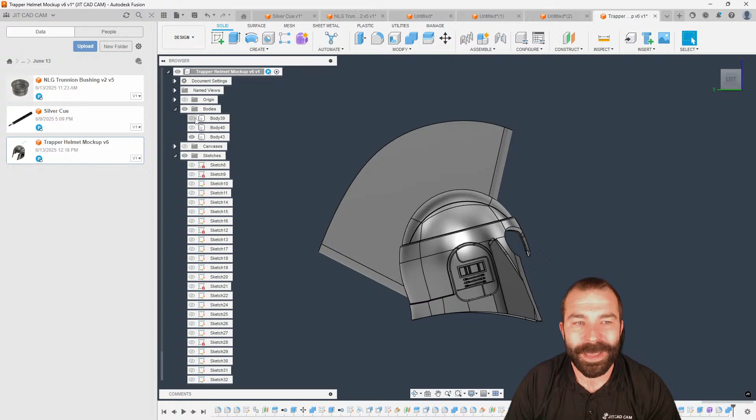But one neat thing I've showed some people in the past is if we go back and we actually turn on our origin, this is where I want to split this in layers, right? So I can actually go in and create an actual surface here for splitting. Let's go ahead and create a sketch, create a surface. And then we are going to create a patch. Now, what this allows me to do is to create my layers to split this up.

So again, we go into a pattern of that surface based on our direction, and we're looking for that axis there. And again, we can now say symmetrical. I want to space this out in 200mm spacings. I want an extent amount. We actually want to go spacing, not extent, by 200. And just like that, I now have my layers to split this thing up.

So again, we can now go back. We're going to split this entire one body utilizing these different tools. And that bottom one is useless, so let's go ahead and get that bottom one turned off. Oh, we went ahead and missed that. Give me 1 sec here. Let's do that one more time. We don't need the top one.

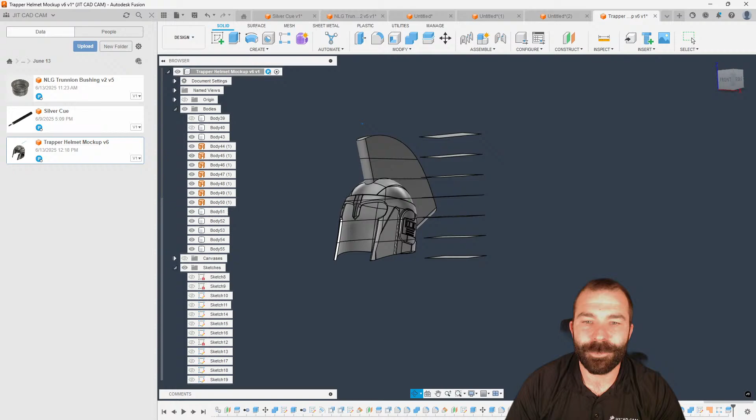There we go. And just like that, we've now layered out several different areas of that actual helmet. So again, if you wanted to go 3D print this, as you can see, you have your different layers for the helmet. We can 3D print each one individually. We could actually up the ante even more. This is why I love doing this.

Maybe you want to now throw in some dowel pins or something to align this. And we could put a circle here and a circle here. And then I can extrude this and this. Again, we'll say symmetrical in this case, just because it's going to go both ways. New body. And then now we have the bottom and the top being able to be held together. Oh.

So, Zach, I hope that helps you out. By all means, let's go ahead and shift gears. Elijah in here with more fishing lure questions. Let's see, Elijah, did you send that in anywhere? I haven't seen it. No problem, buddy. Now, one more thing I'll leave you with, guys, while Elijah gets the chance to put something in chat is, oh, last week? Okay, I'll take a look at that here. We'll try to get that back home.

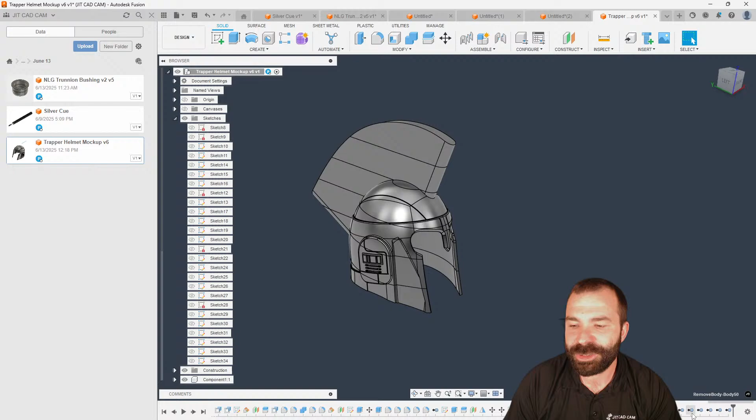One, you usually don't want this to be individual bodies, so I would recommend converting these to components. But when you get down to that workflow and you've got everything the way you like it, it's always nice to clean things up. Now, you can go in and you could actually do what's called a remove. And what that will do, as you can see, is it just removed all of those bodies and surfaces that we had. And it actually made a remove in my timeline. So again, now when we look at everything, I have all my helmet pieces as separate components. I actually have my dowel pins in there, as you guys can see as well. And I removed any additional things like surfaces, bodies that we don't need anymore.

Again, this is just a use case where if I back up my timeline, I'm actually going to do a combine. I would like to cut this guy utilizing what would be my dowel pins. Let's go back a little further. We need to go ahead and go before we created our components, right? So again, we know our dowel pin 1 and 2. So let's go ahead and do our combine. And then our tool is going to be this guy and this guy. Now we're going to keep that tool once we cut. And the reason for that is now we need to cut the bottom half. Again, this time we're going to go ahead and turn the keep tool off, picking the same two.

And now you'll notice those tools disappeared, which is the bodies, but we have now officially cut into our model again. So once again, that rinse and repeat, we go ahead and take all of that helmet, convert those to a component, take all of that additional stuff that we've used for modeling and manipulation, and we're going to go ahead and just remove those all together from our file, and away we go.

Awesome. Let's get Elijah's piece pulled up here. Let's get back to the old free support. That was June 6th. And where was it? It was Lures Op 2, right? Lure fixtures 3 each. Was that the one? Let me know in chat there, Elijah. Which one are we going for here?

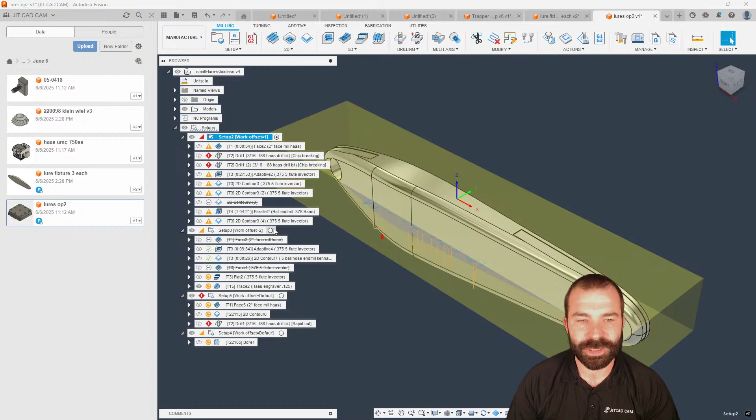Yep. So here's your second setup. Manufacture. I see what your problem is. So what you're saying is you went from setup 1 into setup 2, right? Looks like you're making your pallets. I'll give you a second here to throw in chat. Well, I see here in your model, you have, of course, your pallet that you made. And then from your design standpoint, you have your 3 separate lures, right? Give you a few seconds here.

Actually made that pallet better. That's good to hear. I'm glad to hear that. You're going to email the new one? Awesome. I'll wait for it here.

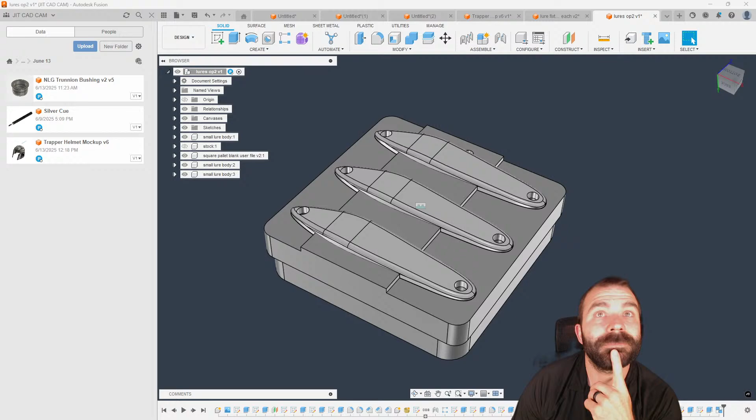Sorry if it's a little quiet at the moment. I'm not sitting here rambling on. I'm trying to do a million things at once, as you guys can imagine. Our fancy dancy bootstrapped operation over here. Yours truly has to get everything done by himself. No, I'm just kidding.

Open in Fusion. There we go. Continue in background. Don't see any other emails. No more tickets in yet at the moment. Sure thing, Zach. Go ahead, send it over.

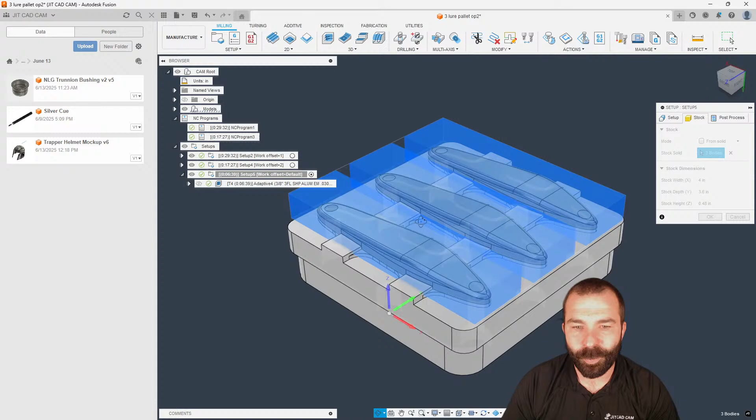And there we go. All right, we're back to the fishing lures. We don't want this one and we don't want this one, but I'm probably going to regret this because we're going to have to open it back up anyways, right? All right. So here we go. Elijah sent stuff over. Let's get OBS back up. Cool. So the dilemma, as I'm hearing, and I'm pretty sure I already know, is once you went from setup 1 to setup 2 is the continuous rest machining. Am I correct, Elijah? You have to let me know.

So this is one that's tricky because, one, I remember in your first setup, you weren't symmetrical in all 3 setups, so it gets a little tricky. But I'll show you guys a couple of things here. So first and foremost, I'm going to go ahead and jump back to the design side of things. Now, in this case, you do not have your lure. I'm thinking right. Yep, it's down here. Okay. So your lure isn't coming linked in. That would be the first thing. And I'm going to show you why this is important when we talk about linking this in.

So what I actually do need to do is I'm going to do a little preparatory work here. Let's go ahead and get this saved so that we have it with everything. And what I want to do is I want to export one of these guys. Again, small lure body. Let's go.

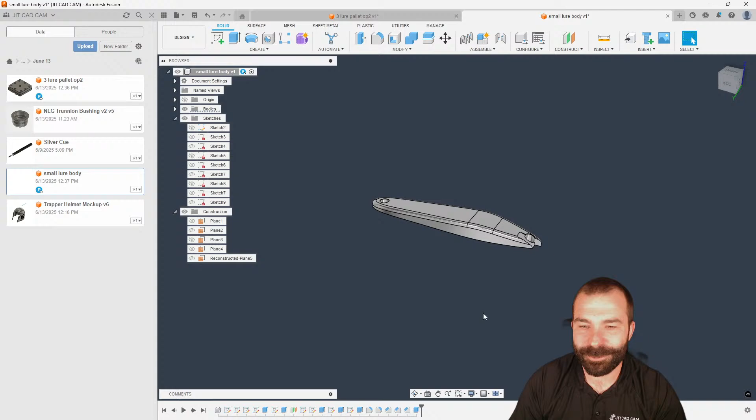There we go. I don't know what happened to the front of this lure. Maybe somebody can explain that to me. Was it all messed up here too? Looks like you got some weird things going on here. Get some sauce for a little bit of A1, right? Okay, there we go. For the sake of this actual tool, what do you got going on here? When did you do this guy in your timeline? Right there. Let's get that out there. Boom. We're back to a normal part.

So first and foremost, I'm going to show this to you guys. It might be helpful to you. It might not. But from a manufacturing standpoint, I'm going to do this against what I would call the original customer part. The idea would be is we would do this all stacked up in a file, and then it would transfer through to our actual jigs. So if I go in and I create my setup in this case, and we do know one, my Z is upside down. So let's get this flipped.

So there we go. We're going to machine this from the backside. We're probably going to face it off, right? I can't remember off the top of my head everything we did last week, but it's going to be all right. There we go. There's our facing tool path. And then presumably we're going to just adaptive rough around the outside.

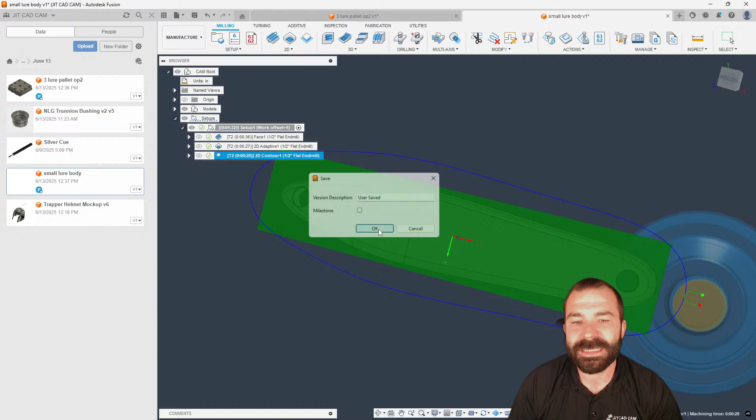Again, we're going to go to a certain depth. I like that where it is. And let's just hit this with a 2D contour. Boom. Beautiful, right? So what I've done so far is I've now basically prepared my stock for anything I'm going to do after this. Now, the reason why I wanted to do this at the individual part model is because

when I go back to this pallet that he's utilizing, now this is where he's got organization. So he's got a component set up for the lures themselves. And if I insert this guy in here, one, you're going to notice there's my part, but now it is linked. This is a link between my actual part I'm manufacturing in my jigs and fixtures back to the original customer part in this case.

So again, if I do a joint, and let's just say we're going to go bottom. Let me guess, that's not a round hole. There we go. That one's a round hole, if yours truly can pick it. There we go. And we are going to place that. Looks like here. And we're going to flip that. So now we have our lure in place. We have it in our first

pocket for manufacturing. And when we jump over to manufacture, what you're going to notice is I can now import the manufacturing data. So if I say insert manufacturing data, did I not save the other file? I did save the other file. Let's go back here. Let's see what's going on with this thing. So again, we want to insert manufacturing data. And we're not getting that data to insert. So now we're going to have to play the game of troubleshooting, right?

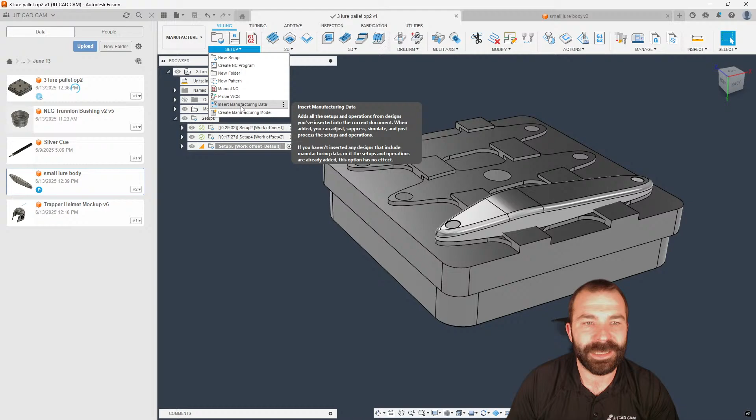So again, we have our setup. We did some toolpaths here. We should be bringing that data over, which for some reason we are not, which would possibly lead me to believe that it's at the wrong level of everything going on, or we lack a save here. Let's start with the save. And now let's try to insert our manufacturing data. Again, we're not getting anything. Give it a second to save. Maybe we're waiting on something still. Or maybe I'm crazy. You guys let me know.

Is it because we're too far down in the system? We should not be, of course. We have our part inserted. Let's go ahead and insert this into a blank file and see what happens, right? Maybe yours truly put toolpaths on the wrong part. There is our small fixture lure. Let's switch to manufacture. See, we are getting insert manufacturing data here. So this is where we're now seeing that CAM data come through.

So it must be something in the way this is set up, which would lead me to go back to design like always. Let's go ahead and undo. I'm going to insert this at the top level just to see if that will fix the problem. So again, before we go through and do all of our joints and everything and link this together, let's just check our manufacturer. So it is something to do with the part actually being at the top level possibly. And I wanted to show you guys this because, again, we have that linked data.

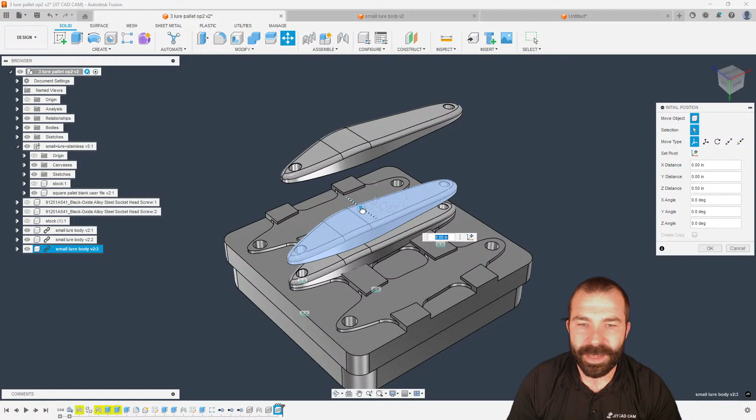We're going to go ahead and go back to design. Let's get our joint in place this time. I'm going to build some content for you guys one of these days around the whole idea of like tombstones and fixturing and things of that nature. But there we go. We have our actual part in place. I'm going to go ahead and copy and paste this a couple more times. There we go. We now have 3 identicals all linked back to the original. A few more joints here just to get everything all nice and pretty.

And we're going to do that one more time. Repeat joint, bottom center. Get that on that hole. So now when we jump from design over to manufacture, what you're going to see is it's going to try to bring in our toolpaths for each individual one. But the neat thing that's happening right now is each one is on its own setup, but we have the ability to do quite a bit here.

So for example, if I'm using a 0-point fixture system, I can actually go in and redefine different things based on that geometry and that setup, right? So again, you have the ability to repick, redetermine, and redefine what you're trying to do. Now, what I am seeing is my XYZ is in a weird position. So let's go ahead and see what's going on there as well. Regenerate everything.

So again, we may need to fix that as well. So again, let's see what's going on. We can't repick anything, but we can break that link. But what I want to see happen, yep, so all of them actually rotated it to, what rotation are we in? Get everything out of the way. There's our part. Offset one of the holes on the bottom. I need a little bit more information on what you're looking for here.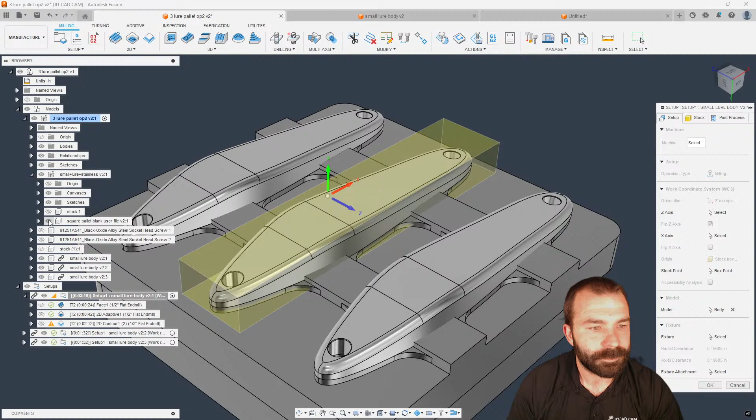So let's go ahead and do this. We're going to beat the system. Let's break the link. And now let's edit this thing. I was thinking about this backwards now that I'm in my own head. I was thinking at the end of the day, what you're going to want to do is define this based on, we would actually need to model this at the pallet level, which I have some tips and tricks for that as well.

Oh, we're upside down again. There would be no pallet. We're going to say Z-axis the other way. Let's get these toolpaths working. So again, there's our blank that we're going to utilize. I'm way off. What is going on here? Let's go ahead and regenerate. All of our toolpaths are upside down, and I believe that is because this is forced tool orientation because of all of the stuff that we've done.

All right. Let's back up a few steps. This is what happens when I don't get time to fully investigate something, and you guys get to see me do this in real time.

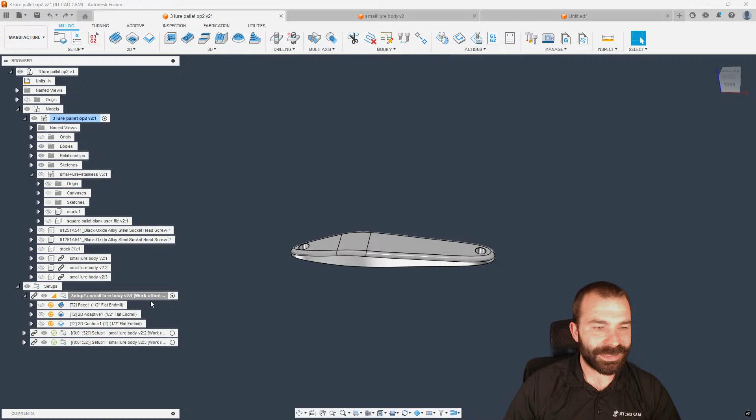All right. So what's happening is we are getting an XYZ orientation here, but we're actually able to control orientation as well at the individual tool levels. And that is what's getting me when we talk about this jig and fixture, right? So the idea would be I would break the link. Of course, we would redefine this. Let's get our Z axis the right way. We're going to go ahead and do a bulk edit here. We want to turn tool orientation to no. And now we're actually machining the backside of our part, right?

So again, if we now go in and we set up 2 in this case. From preceding, we're machining said body. Again, this is where we need to make sure everything's defined the same. Pick our Z, pick our X. Flip this back the other way. There we go. And this is where the continuous rest machining is always going to be a fun battle. So give me a few seconds, guys. We want to make sure that we're not just machining the right body, but we're always using the same linked component, of course, so that our continuous rest machining doesn't keep getting angry.

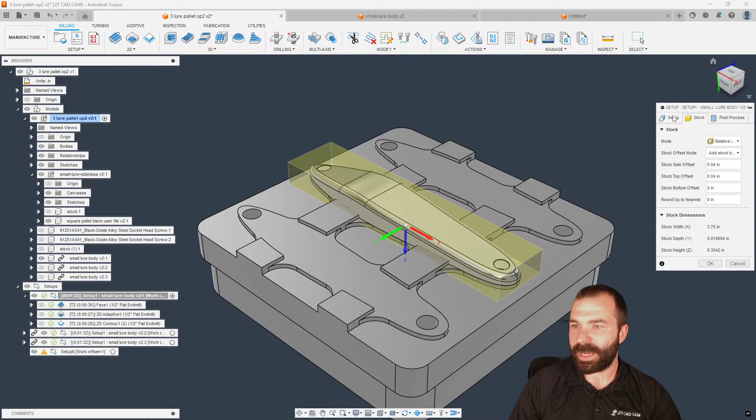Go small. We need our fixture. Yep. So this is what I was thinking is going to happen: it's having a hard time with our original stock and the way everything was defined and referencing the same model more than once. Again, let's just go through this. Yours truly knows all the tips and tricks and secrets. So as you're seeing, we're fighting a battle where it keeps trying to reference something that's not there.

So this is where instead of possibly doing a new setup, let's just go in and duplicate. So everything is the same. Flip our Z. Use our continuous rest machining. And now, of course, it works, right?

Been a long week. Been a very long week here, as you guys can see.

So as you can see, we can start to machine everything back the other way, which means we're working with the stock model from setup 1 into setup 2. So this would be a little bit better of a technique to do, but the bad news is we would need to model one of these. And this is, again, we've kind of walked through this, as Elijah knows, we've done some things with component patterns. We've done quite a bit of different stuff with toolpath patterns. Now, this is where, in my opinion, what would be best is when we get to that setup 2, let's get our fixture in here.

Here it is. So again, when we right away start off, I have my continuous rest machining coming through. We're going to go ahead and swap a few of these tool paths out. Let's say we're actually doing 3D adaptive clearing back the other way. We have our rest machining in effect. This just gets us to the point where we've got that all cleaned up, right? Not the prettiest and most beautiful thing ever, but I think you guys are seeing the point.

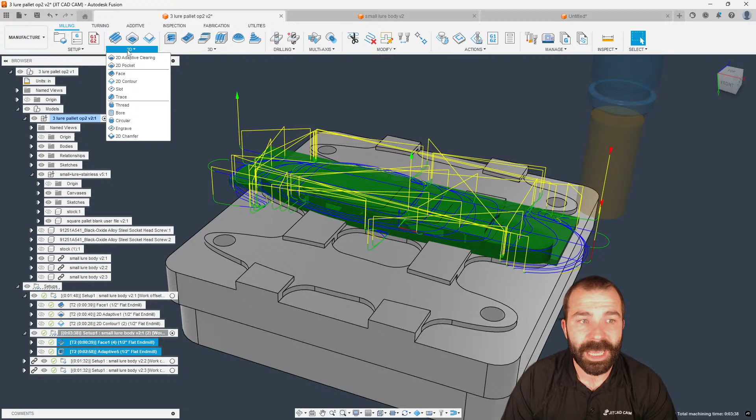This is where doing something like either multiple work offsets or creating a nice pattern comes in. And again, with Elijah's setup, this works really, really well to say new pattern. Now I could do a component pattern, or I could even do a duplication pattern. A duplication pattern is going to be as simple as, where's he got his holes? We could say, I want one not just here, but I want one here and I want one here, right?

So without those models being in place, I can create those patterns that are going to rough and machine each one individually and stack them across multiple setups, right? So as you can see now, I have all of my tool paths, even though I only have one component in place. On the design side, had I put all my lures in their positions, as I have done here, if I go back to manufacture, instead of using a duplication pattern, I could say component pattern, pick my first component. And again, what's going to happen is it's now jumping to see all the other ones, right?

So we do have a ton of actual content on fixtures and tombstones. I'll build out some more content, especially with this workflow being as messy as it is, because if we simulate this right now, it's going to be a little bit ugly because we're working with just one as it sits, right? So this is where you could start to have some different problems. And again, the idea is mass production of something like this.

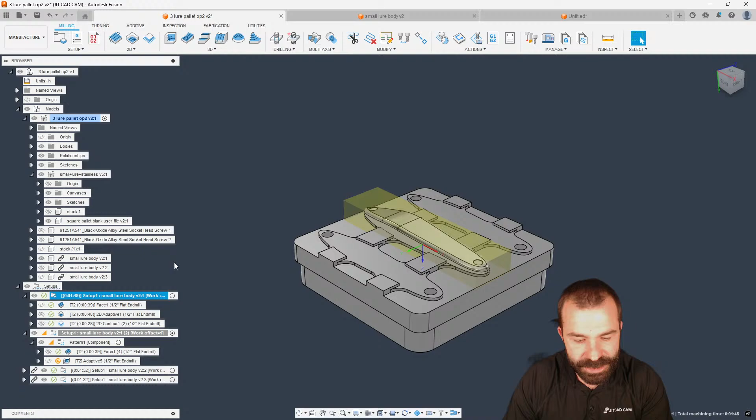Now, if you really wanted to get technical with this, what I could do, it's not the best of cases, but let's say, for example, I am going to run all three of these from the same work offset and everything of that nature, right? So what I would really need to do is go through and create a setup for each individual part. Now that could be duplicated, right? So again, as you guys are seeing me do here, I'm duplicating this. I'm going to the second one now.

As you can see, this is my second part. We're going to go ahead and see what we can regenerate in toolpaths. Again, I am going to fix this because it's not recognizing. Again, this is where instead of utilizing the ability to pick a chain, if I did something like silhouette outside, right, I can auto pick and define these toolpaths for me. So again, as you guys can see, here's my second part. Again, I could take this and duplicate. Give me one sec here.

And what I'm doing is now creating, again, another rest machining from preceding setups, utilizing the same model selection, giving this one now its own fixture. And as you'll see, we now have 1 and 2 in place. So again, I need to get a little further down here. As you can see, there's now 2 parts next to each other, each have their own stock in place. Now I can't activate both of these at the same time. So again, I could manually turn one on, turn one off.

But this is, again, when you get into those really nitty gritty niche kind of workflow type items, right? So again, we'd have to go to prepare and edit. We're going to do tool orientation. No. Okay, that's good. I think I just failed to flip my Z on that second one. I did. There we go. There's our facing on the backside, right?

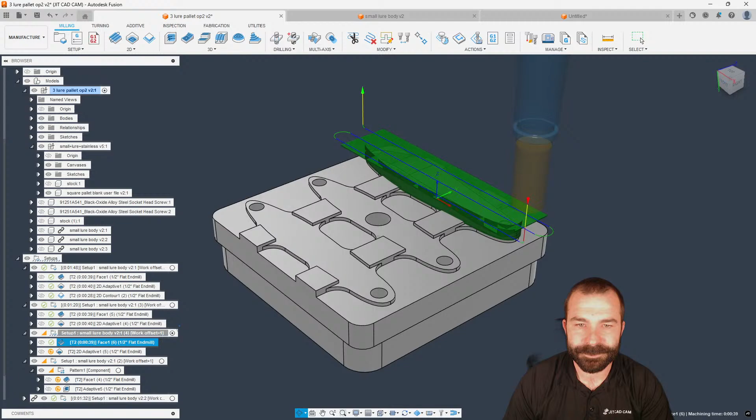But when you go in and you start to get further and further in this, you're going to realize you're setting up each one individually still at the end of the day. But what I would personally do is my setups are all going to come from the same selected origin.

So again, I'm assuming you're using bottom center of the pallet. Now, this one is going to be based on the math from that location. My next one is also going to be based on the math from that location. I just have to program each part individually here, all referencing the same WCS location, right? Because what you're trying to do is run 3 parts on the same pallet, all from one work offset, but you need that stock to be recognized and pulled through automatically.

So again, this is very messy, guys. Don't get too caught up in this. I know we lost quite a few viewers as I start to get deeper and deeper in here. I will show you guys at the end of the day. I'll build some really good content for you around how to set this up efficiently and wisely so that you're not messing with it as much as I am and how it's going to work even better for you.

In a perfect world, Elijah, in your case, had you machined all 3 of those exactly where they're going to go on setup 2, the continuous rest machining would probably work quite well. This case is not it, because what I'm having to do, if you wanted a summary, is basically split each one of these out individually and program each part so that that individual part is being ran in setup 1 and setup 2. Sorry, guys, I'm going to have to break the link.

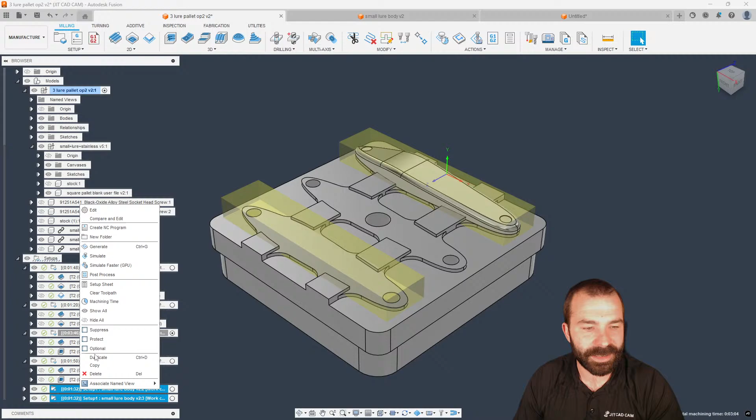And then let's delete these 2. So again, if I get this the way it should be, that's setup 1, setup 1, setup 2, setup 2, right? So now we have 2 setup 2s in place. When I post this out, this is where it really becomes fun, because I'm posting both lures on the same jig from the same WCS, but I can now utilize things like minimize order for tool changes. And it'll reorder all of my stuff if I was using different tools. So this is where I may need to set up different tool numbers to try to group things in a production environment.

So I hope that's a little bit more helpful. I know it's not ideal, but when you get into the world of production, everybody thinks it's fast and easy, when you're going to find yourself spending a ton of time, as you can see here, scrutinizing down and trying to machine these out as much as possible and get a nice, clean, and simple workflow, right?

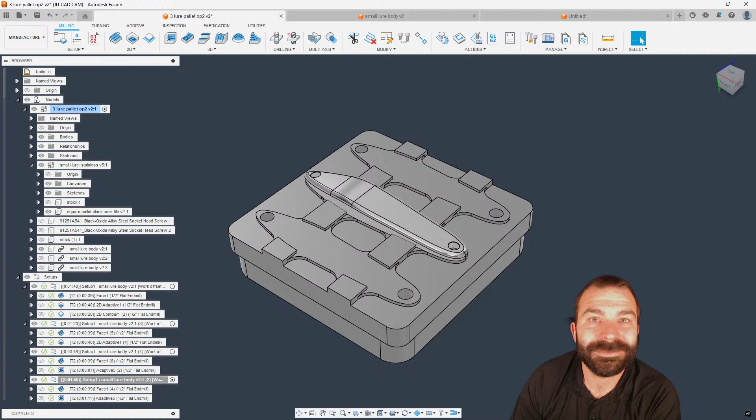No problem, man. Let me go back to my email and see what you got. A sword model. Here we go. We're going to go ahead and get this downloaded. Give me a few seconds here. We're getting down to the wire. How long have we been going? Oh, man, we're hitting the top of the hour. Sorry, we're closing it down. We're not going to do it, Zach. We're gonna hold off. Just kidding. Let's go ahead and see what he's got. Maybe I'll change my mind the moment I get this all opened.

I know I'm a huge fan at the end of the day. Anytime you can palletize something or make your life easy, this is the way to go for sure. You can do things so much faster. You can then change the parts on the pallet outside the machine.

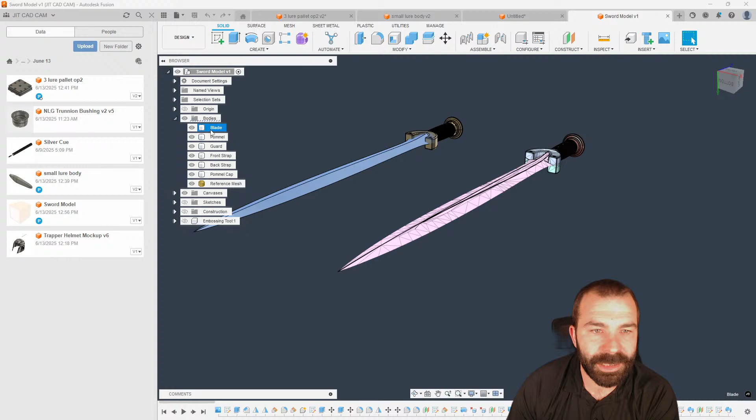How I would do it. Oh, that's always a good question. All right. So presumably you have more or less 4 points, and it's technically 2 separate profiles, but it is technically symmetrical top and bottom, and then it is symmetrical front and back. So that's probably where I would start at the end of the day. Now there's a lot of ways you could do this.

Just for my sake, I would possibly look at doing something in 3D and then possibly doing a sweep or a loft kind of profile if you can get away with it, right? Now, if I'm thinking in the world of a loft, there's a lot of things I could do. I would start by creating a sketch, and then I'm going to use a rectangle to determine this. At this point, let's say this is where the handle is going to meet. I would like my profile to look something like that, right?

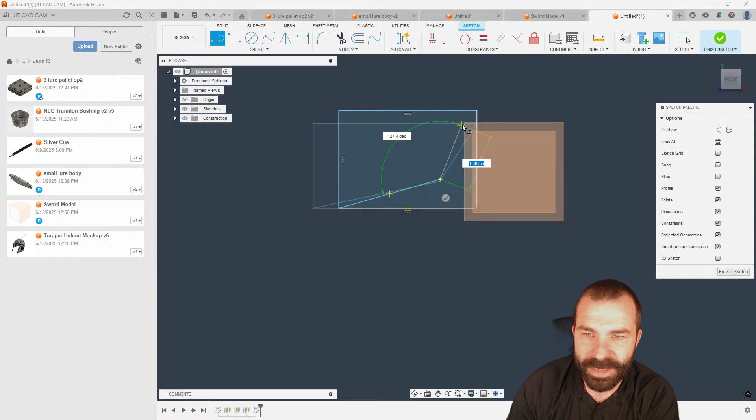Now, if I was to use, like you guys saw, that kind of layer cake method, where I start to create additional planes further and further out, right? Again, we're going to go one more off of that. But what I'm really looking to do is to continue with what I have, right? So now on this plane, another rectangle, but I would like this to possibly be a little bit steeper of an angle, right? Or a little bit less here and here. And we're going to go ahead and do another one.

So one more time, we're going to create a new sketch here. And we're going to do another rectangle, because why not? Who doesn't love some good old-fashioned rectangles? Back again one more time, a little bit less here. And then one more here down at the end. And we'll just make this a very small defined area.

Okay, so now that I have my profiles to go through, right? Like I said, I could either do a loft or something like a sweep. So if I do loft, I can actually loft the segments to one another. So if I go here to here, to here, to here, I think you're already starting to see what is happening, right? You're going to have to let me know in chat, but without doing the tip, as you can see, I've gotten quite a bit, and then I can step this up a little bit further with a little bit of mirror.

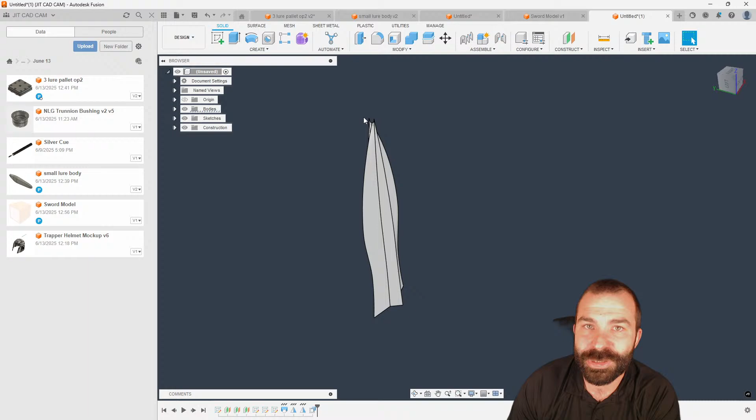So again, I want to mirror this half this way. We're going to join those two together. I'm going to mirror this a third time, take this whole body across the backside. And then just like that, I've created that profile. So if I start to use press pull now, I can pull this out to a point. Now it is going to break because of the overlap. So I do need a couple more of those sweep functions. But again, this is the cool thing about this.

Now, this is a pro tip from me: if I go back to those sketches and I want to manipulate this shape, I have full range in here to start to pull and push and change whatever that profile is in real time. So if I wanted to bring this further and further down, as you're seeing me manipulate one, everything else is also manipulated on the fly, right?

So again, a little bit wider here, a little bit narrower here. Maybe we'll bring this in. And all I'm doing is I'm controlling those based on those couple of parameters, right? So what I'm going to do is I'm going to delete that offset on the tip of it. But as you can see, it's basically as simple as that.

Cool. Any other questions from anybody out there? As you guys have seen today, we've covered everything from some modeling to a lot of CAM stuff as always.